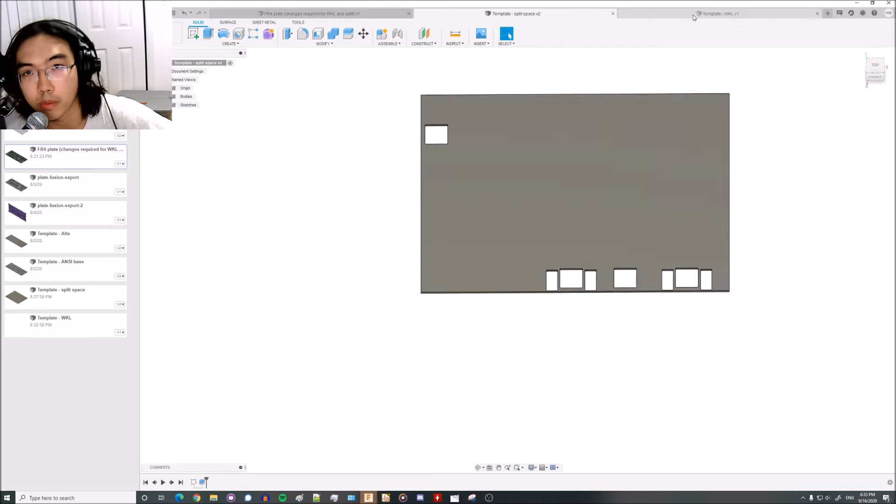I'm just gonna wait for some more people to show up on the stream before starting. In the meanwhile, I'm doing some plate work on Boston. I'm adding split space and winkeyless to the plate. So I'm gonna be doing that for a couple minutes until some more people show up, and then I'll get started designing Gondo's PCB.

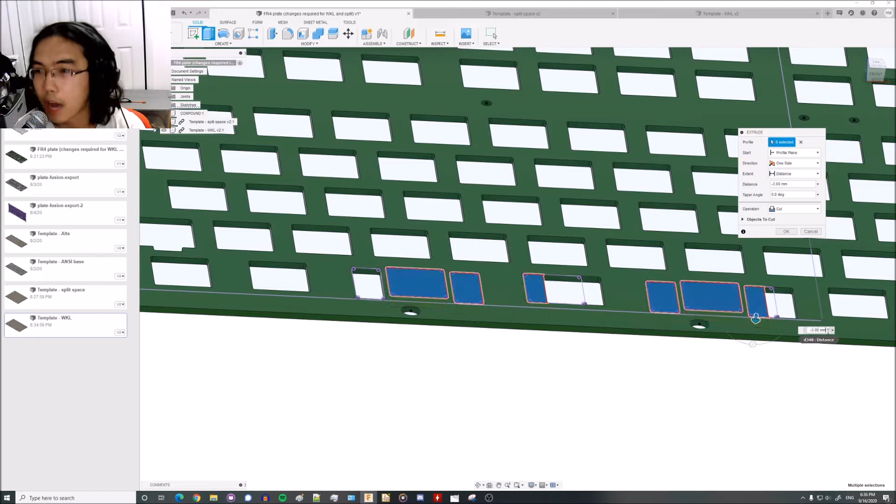So I'm actually gonna do it partially. I might just straight edit the KiCad plate file. So this is an FR4 plate, so I actually have a KiCad file for this too, in addition to the Fusion file. I could make a new KiCad file for this new plate, but I'm gonna see if I can just edit the original KiCad file, and that might save me a bit of work. Because all these holes and stuff, you have to basically place in KiCad new. So...

It's negative 0.5. Wonder if I can see who's watching. Okay, let's do winkeyless. So I'm gonna do the same thing. I'm gonna join this plate to here.

It's backwards, I'm gonna flip it. That looks right. Okay, and then I'm gonna do the same thing. So make a sketch on the original plate.

And if people have questions on what I'm doing right now, feel free to ask in chat. It's gonna project, should give me all the outlines for these cutouts, and then I'm gonna hide that and use a sketch to do a bunch of extrudes.

Oh, that's okay, that's a stab for the 7U. This, and I think that's it. Oh, it's just wait, oh these are for the 1.5U. This really fucks up the plate, doesn't it?

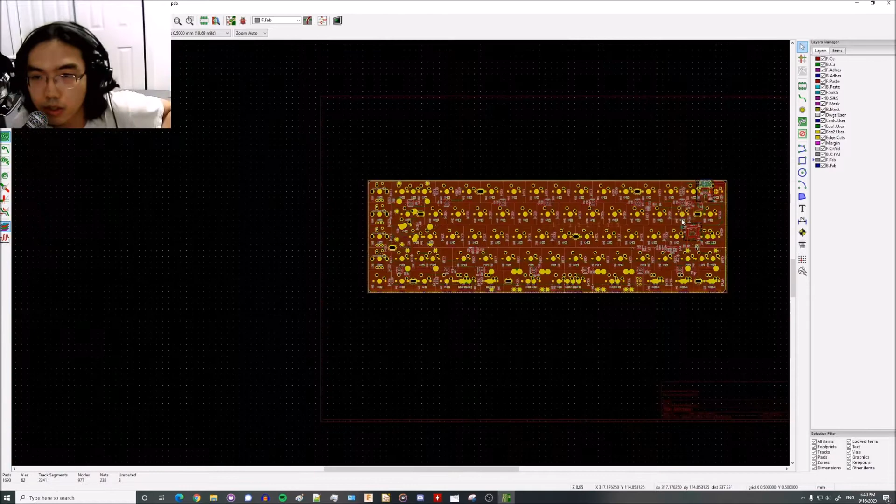So this is Gondo's PCB in KiCad. Let's export a step of this. We're gonna go to File, Export Step. Actually, let's go to 3D Viewer first and see if all the components I need are there, because a lot of times the USB port isn't there. Let's see.

Okay, 3D Viewer, yeah, it's missing the USB port. Let's see if I can add that back in. Otherwise, I can just pull the step file off the library and then add it in Fusion.

So you go to the component, this is the USB-C port. Right-click Properties. Update footprint, open footprint editor. There's usually a properties section. There should be somewhere where it sets the 3D file. Oh, 3D settings, okay, that is right. Step file.

So let's just export it and then I'll add the USB port separately, because it has these two mounting holes and that's a really easy joint in Fusion. Export step, let's pick a directory, export. I think I might have exported this already in the past, but let's do it that way.

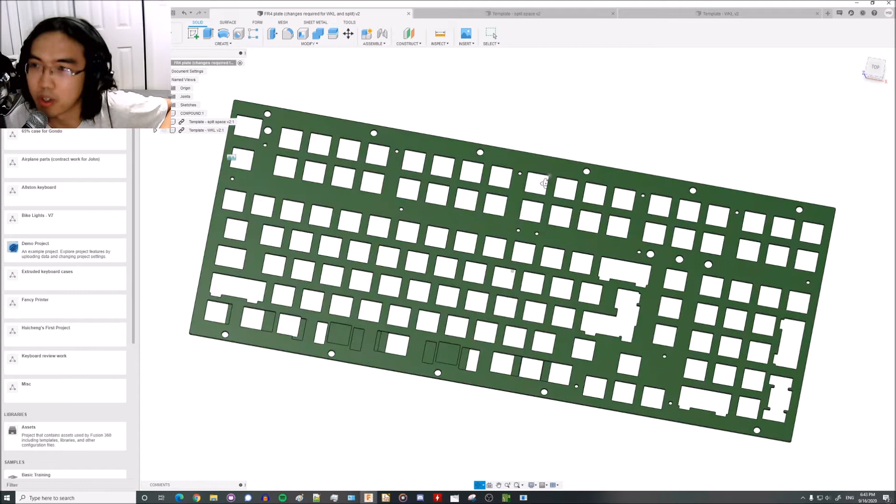Yeah, I guess I'll probably take a look at FreeCAD. I'm really used to SolidWorks, which is like $4,000, and that's what I generally have used during the day job as an engineer. I would really like to have that, but that's $4,000 and kind of hard to justify. Fusion does most of what I need to do. Yeah, I'll go check out FreeCAD at some point. I've paid for Fusion for another 6 days, and then maybe after that I'll check out FreeCAD.

Okay, let's close this because I'm not working on these anymore. So let's start a new project. This is Anticheww case.

All right, so let's upload the steps.

Yes, I have SolidWorks too. They did a free license last year. Oh, there's a free way to get SolidWorks? I would like to know that, because I've only had SolidWorks access when I worked at a place that used it, and it would be great.

Okay, so where did I export that step? Should be an Anticheww step.

So the first thing we're gonna do is add the USB port because that's missing. Let's also upload the USB port - that should be in the Acheron library. So GitHub, Acheron library, 3D models. Let's do the USB Type C 31M12. That should be the USB port.

Cool. Wait for that, and then once we get the PCB set up, I'll describe what I want to do for a case. So let's open the PCB. Let me rename this to the Anticheww PCB. Okay, so here's the PCB.

So I'm going to do it similar to the Boston cases I have now. Where's my bus? Oh, here it is. So this is my Boston prototype - I'm going to do a case probably similar to this. So the thing with Boston, I designed this to be made on a 3-axis CNC. So if you look at the side, it doesn't really have an angle. I'm not sure if I can show that well. Okay, there we go - yeah, sorry, this is a terrible camera.

So most keyboards look like - I don't know, let's pull up an example. Let's pick any keyboard, let's say Austin. So these have an angle on the side. There's no good side profiles - maybe this one. Let's see if there's a side view. Maybe not, okay let's just go to - I know, what's a random 65%. Okay, Aurora input series - this is kind of a bad example.

We can kind of see, so you have this typing angle here, and then you have where it meets the table, and usually this is like, I don't know, 6 or 7 degrees. So a lot of cases have those two as one piece. The issue with that is it's really hard to make on a typical CNC. A typical CNC only has 3 axes, so it can go in X, Y, and Z. If you want to make this angle, it gets a lot harder - you have to have special fixturing so it can hold the case at an angle when it mills it.

If you have a 5-axis CNC, you can do it pretty easily. If you have a 3-axis, you need to make special fixturing. 5-axis CNCs aren't really accessible to a lot of people, so you'd definitely have to send it out to a machine shop. Whereas with a 3-axis, there's a chance your local makerspace has one. So I'm going to design this to be easily made on a 3-axis.

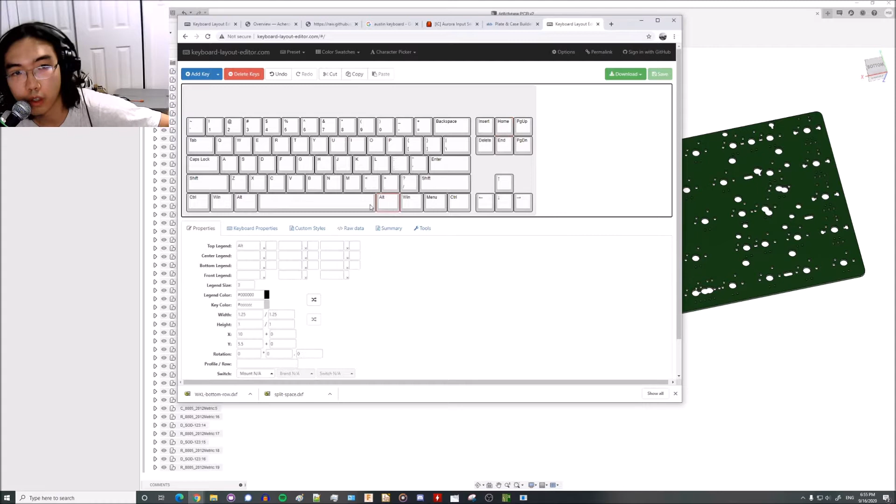First, we're going to delete the F row because 65s don't have that, and delete the numpad. Then these keys get moved. So this is the layout we want to do. Let me rearrange these windows - let's put this one on the left and this one on the right. So these are smaller. Anticheww supports a lot of layouts, but for now let's just do the basic 65%.

So this bottom row right here - there's no right side Windows key, and then these all become 1U. So 1, 1, and 1. This gets moved over, and then there's a 1.75U right shift, so this becomes 1.75. Let's move the arrow keys over.

And then have page up, page down, home, end. These actually aren't that important which keys end up where, as long as their unit size is the same, so as long as all the 1U's end up in the right place. This doesn't really matter, but let's just do it anyways. Okay, that looks like a 65% to me.

And then we'll add ISO and all the bottom row options real soon. If you go to raw data here, it'll give you all this raw data - this is what the plate generator takes in. So I'm going to copy paste that into here. I want MX stab type. I mean, no one's really going to use Costar probably, so I'm probably just going to do cherry only.

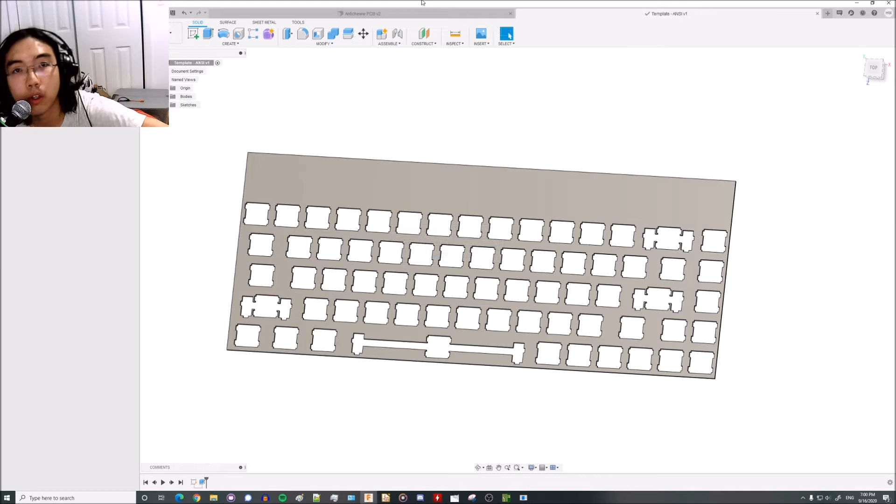Okay, Anticheww PCB - okay, so let's start the actual case design. We're going to make a new design, let's save it as Anticheww, aluminum case - also this is going to be top mount. I haven't really done gasket mount or other styles before, so top mount's pretty straightforward. So let's just do a top mount case. Let's insert the PCB - Anticheww, let's insert the PCB into the design.

You save it into plate files. Yeah, I generally organize my Fusion folders, they're usually extremely messy, but I usually have folders for plates and PCBs. Actually, the PCB I sometimes don't put in a folder, but that's just how I like to organize things.

So we have the PCB. Let's figure out how big we want to make things, and decide if I want to start with the plate or with the top half, the top part of the case. Let's see. Well, let's start with the top half.

So we're gonna make a new component. Let's call it the case top. Case top.

So the thing here, I really don't want to reference any of the geometry off this PCB, because Gondo is gonna make some updates to it, and when the PCB changes I'll have to update it and that'll break every single reference, and then I have to go back and fix all of those, and it gets really messy. But let's see if I can do it without referencing it. Actually, we'll probably have to reference off the PCB, at least for now.

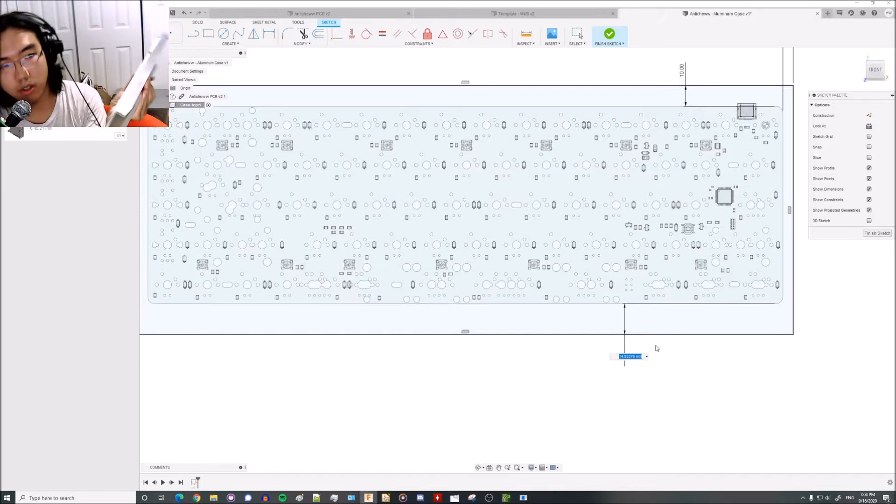Okay, well I can eyeball this. So this distance — the PCB is roughly at the edge of the keycaps, so it looks about, say, 9 or 10 millimeters on top and bottom. So let's use those. Let's say 9 millimeters, and we can make it smaller later if it turns out we can.

So let's do 9 millimeters. What I'm gonna do — I don't want to reference the PCB itself because I'll have to replace that later when Gondo updates the PCB. As far as I know, he's adding a JST header and might add a center USB port.

But for now, let's — so I'm gonna delete all these dimensions, and Fusion's gonna leave things the same size when I delete them. Then I'm gonna dimension it in a way that does not reference the PCB. So it's 313 by 112.

Okay, as long as things don't move, this should be okay. Well, things are gonna move. How do I want to do this? I could just do that off one side here. So I'm gonna have to update these when I update the PCB, whenever Gondo makes those fixes or changes.

Okay, so come to think of it, I should have done this on an offset plane. Fuck, because when I do this extrude, all these features are gonna get in the way. Okay, let me just redo this. I'm gonna delete that sketch, and then I'm just gonna make an offset plane. It makes life a lot easier.

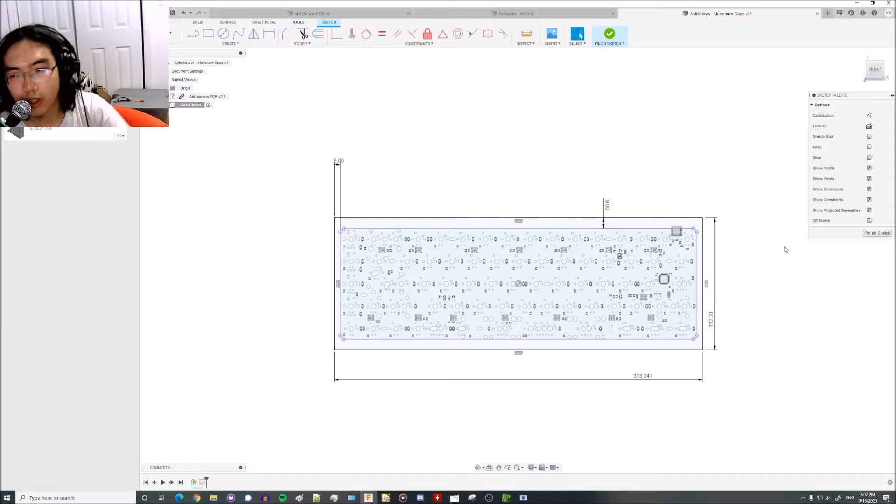Let's delete these, and then actually I want to keep that. Let's keep those two, and then define this by the size. That way, when the PCB changes later, we only have to update these two dimensions and not all of these other ones.

And then let's pick up the distance from the plate to the top. How do I explain this? Let me make the camera bigger. Sorry, where's OBS? This is OBS. Okay, let's make the camera bigger.

I don't really have any good examples here, but maybe I should just do it in Paint. Let's fire up MS Paint. Okay, let's move this so it's visible.

Okay, so you have your plate. So let's say this is your plate. So I'm gonna pick a... this is a top case usually, and it looks kind of like this or something. So the important distance, one of the important distances you want to pick, it's mostly a visual thing. Let's do a different color.

Is this distance from the top of the case to the plate? Actually, let's zoom out. So on most keyboards, this is around 7 to 8mm. This basically determines how much of the keycaps you hide. So you have your switch here, and then you have your keycap, right?

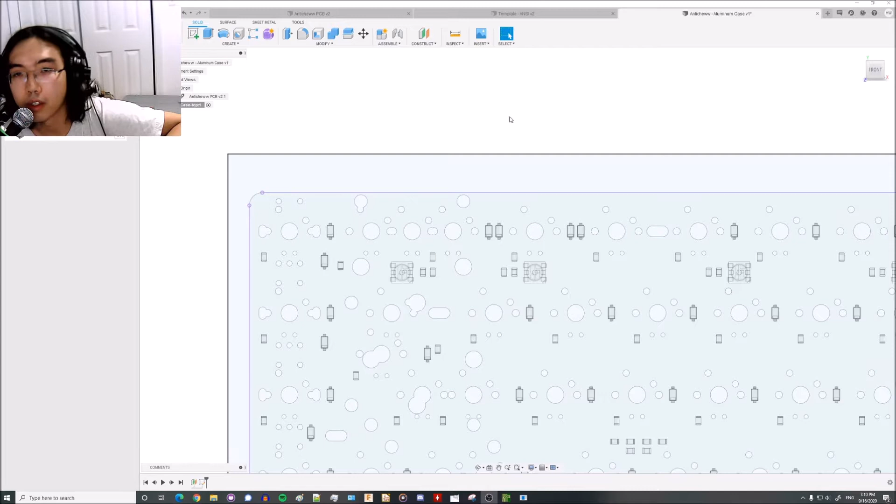So where is it? Okay, there's a couple important keys here. I'm pretty sure this is escape and tilde. Shoot, it's not letting me project. Oh shoot, what the heck is going on? Should be in design.

What? Okay, let's have this sketch here. So let's define the insides of the case, or sorry, the inside edges. Let's project a couple of these. On 65% it's a lot easier because there's no key separation, so we're just gonna do these 4 switches on the corners.

Yeah, so escape, control — actually control's not a great one to do, but it is what's there — and then I think this is right arrow. So let's project off those so we can get the centers off them. All right, so that's next. Let's make the inside edges of the case. Whoops.

It's not where we want it. Let's just arbitrarily place it here.

For this distance, I usually use 10 millimeters from the center of the switch to the edge of the inside of the case.

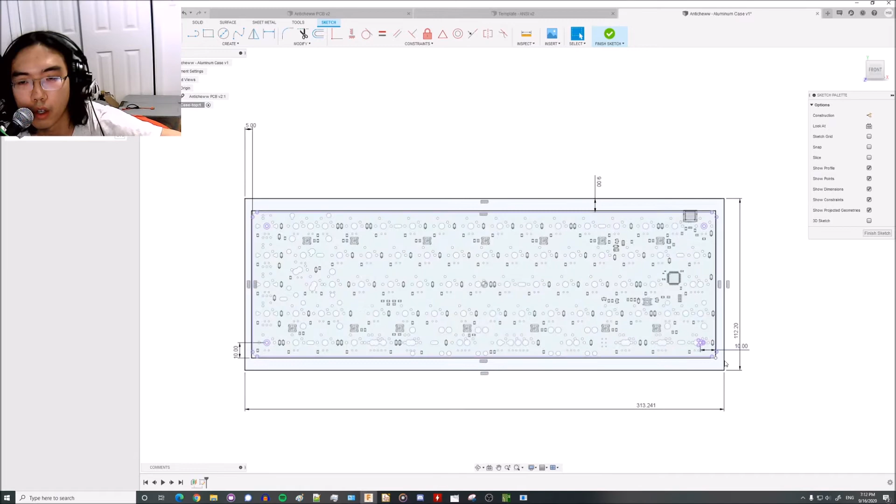Since we're going to update the PCB file later, I want to minimize the number of references to the PCB itself, so I'm still going to redefine these as the dimensions of the length and width of the insides. Okay, so now that's done.

So let's do an extrude. E for extrude. We're going to do 7 millimeters. Okay, that looks pretty good to me.

And then that's the top half of the top of the case. Let's figure out where you want the split between the top and the middle to meet. It kind of varies from design to design, but let's do it past the bottom of the PCB.

So for a second extrude, we need a second sketch. Let's do the bottom half of the top of the case — confusing terminology, but this is also where we set the dimensions of the plate. Let me figure out how I want to do this.

So it's going to be top mount. Let's use M3 screws for the mounting screws — it's a generally pretty safe screw size to use. With M2 and M2.5, especially on an aluminum case, you risk those threads stripping out easily. I personally tend to stick to M3 and above.

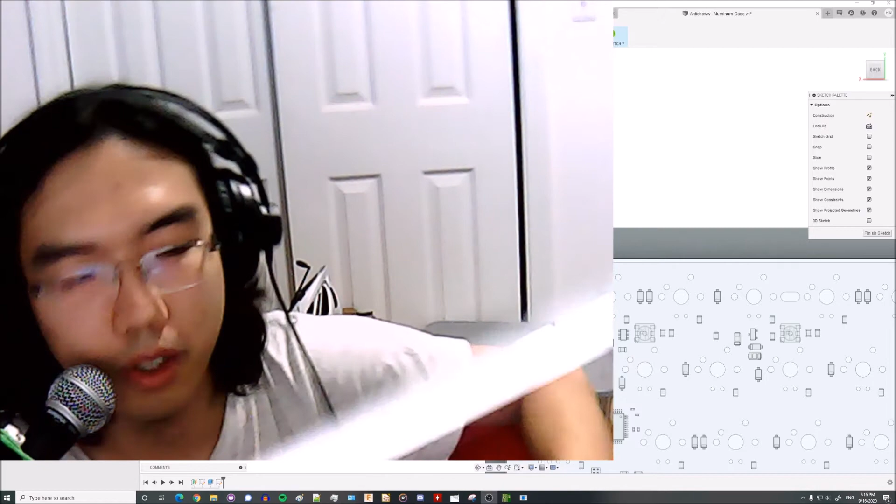So this is a disassembled Boston. This was actually the first prototype. I took it apart because I had to steal the switches from these to build another prototype — I'm kind of short on switches right now and wanted to build the latest prototype. So I took this one apart. This is the top case.

You can kind of see — how do I show this well on the stream? Yeah, this is... actually, maybe let me just pull up the CAD files. That's going to be easier than using this shitty camera.

So, where did I keep my Boston files? It's in keyboard. Okay, so this is Boston, or the aluminum version of Boston as I have it right now.

So the top case, let's isolate it. I kind of did it this way — where's the plate? Here's the plate. Wait, that's not visible. Okay, here's the plate.

So on top mount, you have the plate, and then you have this protrusion off the side with a hole in it — that's where the plate mounts. And it mounts to the top side of the case, hence top mount.

So I have these little dimples here, kind of like circular cutouts in the case for the screws to go. And then I have this for attaching the bottom. But let's add those features.

So on this sketch, we're going to define where these circles are, and also I have these opposing circles — that's where the middle of the case mounts. Let's do visible edges. So that's where the case screws that mount the middle of the case to the top of the case go. So let's do something similar.

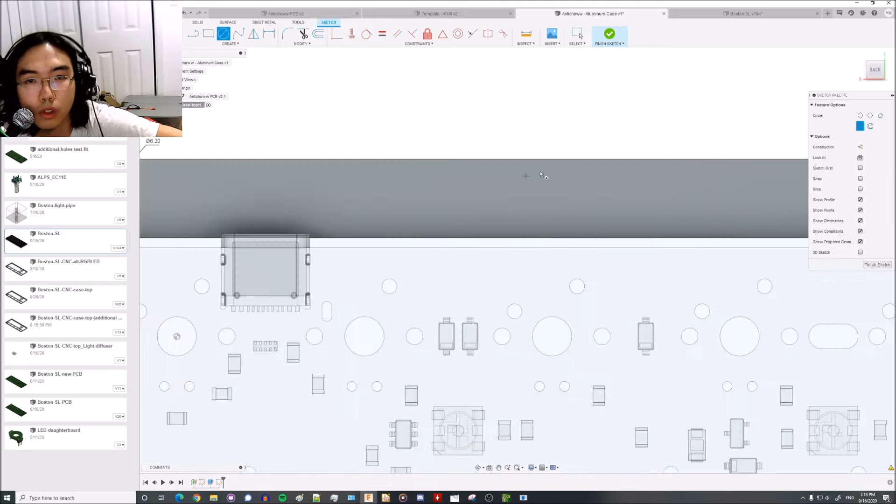Okay, so this corner we probably want to use for the case, and then let's do 3 on 3. Let's do 3 screws on top and 3 screws on bottom. Maybe 2, I mean.

So this is the USB port there. That's not good, makes things a little trickier. Oh, that's really recessed, okay.

Another consideration is this USB port and where I want to put it. Let me think. Okay, so let's have these corners, so we'll have screws that mount the bottom or the middle of the case to the top, going through these holes. So let's do like 4 by 4.

Where's some logical places to put mounting holes for the plate? So we have the middle, I guess. Let's make a construction line here.

Let's make this circle coincident. And then let's do another circle in the middle, so wherever the midpoint right here is. And do one opposite at 2. Is that a construction line?

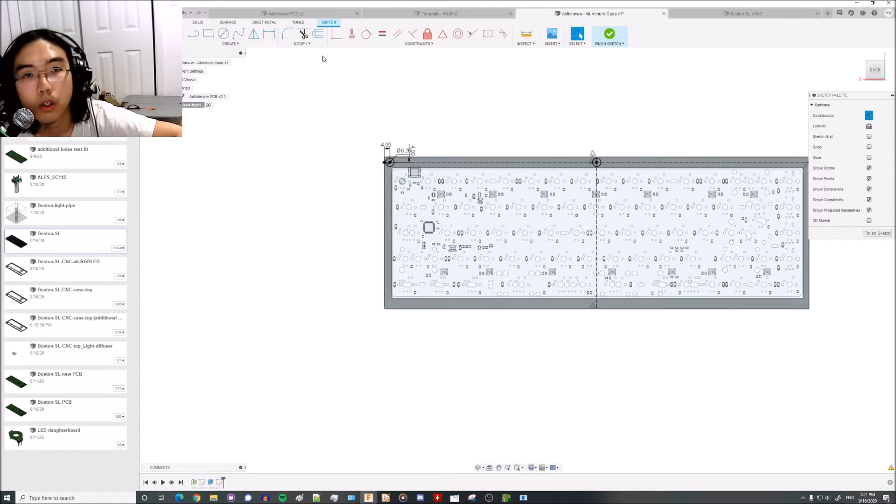Oops, let's do this. So let's add more holes to the bottom. Create mirror. This circle and this circle to the bottom. Then we're going to mirror these 2 circles across this middle line here.

Okay, so let's use these for mounting the case, and then we need to pick separate locations for the plate. This USB port location is unfortunately kind of annoying. I'm pretty sure Anticheww was designed for... was it not gasket mount, or for tray mount, so it doesn't really have to worry about this.

But since I'm doing a top mount case for this PCB, I'm going to have to deal with it. This USB port is unfortunately placed. Let's see, could just do like here.

Like let's do... actually, for the tops, let's do for the screws that mount the top of the case to the middle or the bottom. Let's do 4 of them, and we're just gonna divide this length into quarters. So this is what...

Oops, sorry. So this circle and this circle are 305.241. So let's fire up the calculator. Let's divide that into 4 of them, then we need 5 gaps. So just call it 61. Okay.

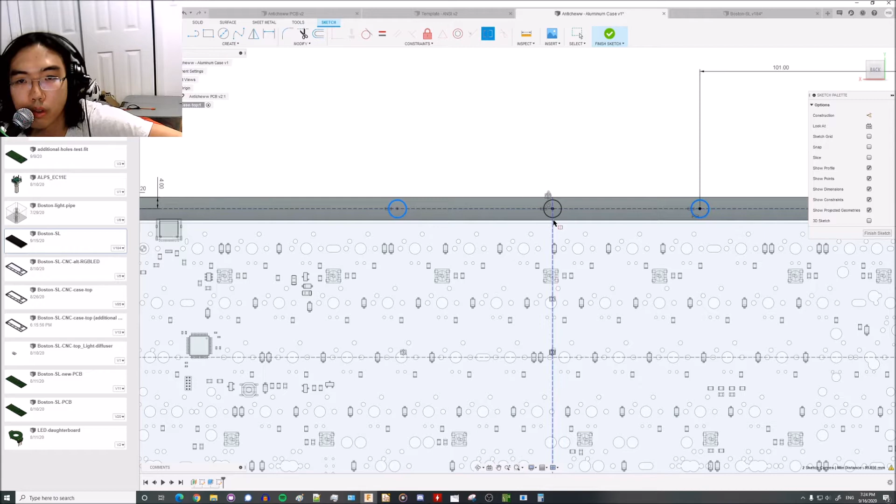So do the same thing here. Equals, and then symmetric, 1, 2, and 3. So we'll use these 4 for mounting the top to the bottom, and then for mounting the plate itself, we'll use this middle one, and then let's add one to each end.

So I'm gonna be avoiding this USB port. Actually, I could make this asymmetrical, so this is home row, so you're mostly gonna be typing here. So you kind of want to feel balanced on the alpha keys, and then these are just like nav keys, and if it feels a little more inconsistent there, I don't think that's much of an issue.

So let's do what, like 15. Let's do like 10. Let's do like 10, okay. Now let's mirror that.

We don't need... actually, we don't want to mirror that because of the USB port. That still might end up feeling inconsistent, because I really want to put the mounting point for the plate like right above this key here, but that's gonna get in the way... that might not get in the way of the USB port.

Let's do like here, whatever this is, let's do like 8. And then I don't think that's gonna interfere with the USB, because I mean, you have the USB cable coming in, and that's kind of wider than the port. Actually, let's do some measurements here. Where are my calipers?

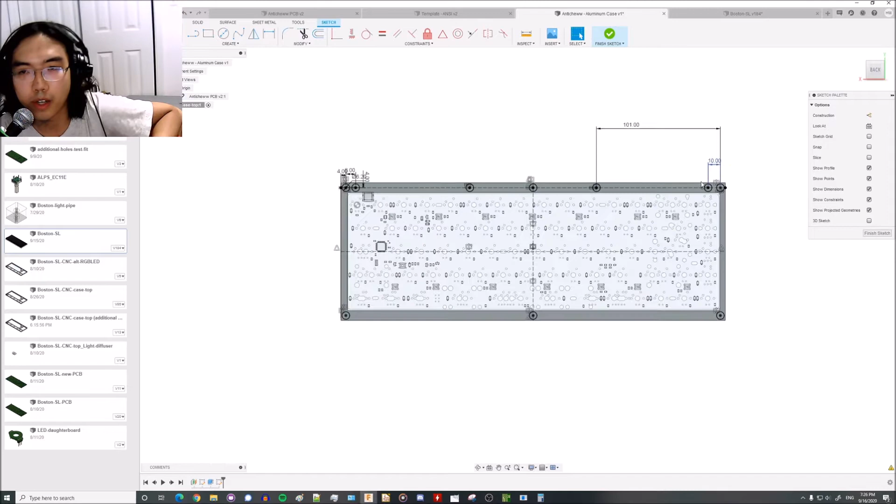Hi everyone, I'm designing a case for Gondo's PCB. I'm in the middle here, so I'm designing the top half of the case right now, choosing the mounting points for the plate. This is going to be a top mount case, so I need to choose these wisely. I'm trying to choose this hole so it doesn't interfere with the USB port.

But to do that, I need to know how wide a USB connector is. To do that, I need to measure a USB connector. To do that, I need to find my ruler or calipers.

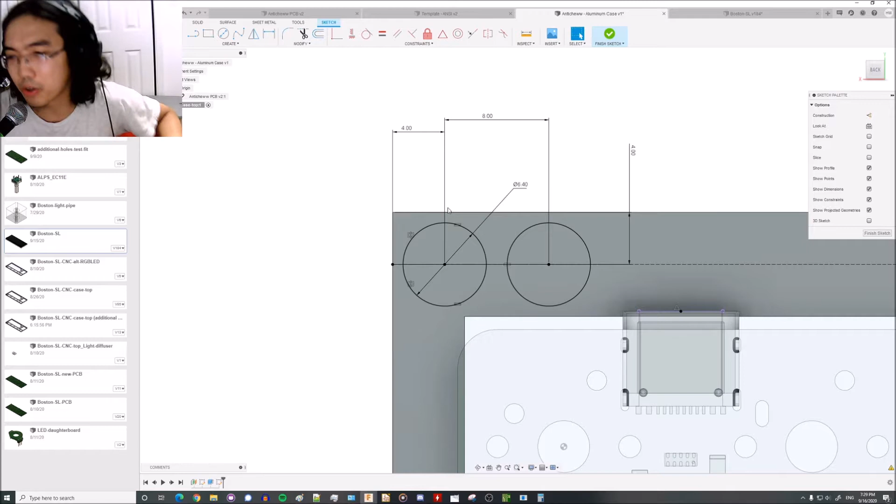Personally, that's like the smallest end mill that I'm not really afraid of breaking. Once you go smaller than maybe 4mm, your end mills start getting really fragile and start snapping really easily. I don't enjoy machining with small end mills because you have to be real gentle with them or they start breaking.

So where do I want to put this hole? We could just do it right over, where's it? Backspace, I think, this is probably backspace. Sorry, let's pull out the layout. Okay, so this is page up, and this is split backspace.

Yeah, so most people use M2. Foggy really hates M2. I personally don't like it either, I've mostly used M3 these days for all sorts of things in my engineering work, pretty much everywhere. I've never really gone smaller than M3. I think I've done a thing or two with M2, but M3 is a lot stronger than M2, and a lot more resistant to stripping.

Also, the larger your screw, the larger the head of the screw is, and the hex they use for the Allen key is larger, and the larger your hex head is, the harder it is to strip. M2s use really small Allen keys, and it's really easy to strip the screws, both the threads and the head. So yeah, I would like to stick to M3 on this design.

So let's try to put this over here. Wait, so wait, this is backwards. Is this caps lock? No, it says right side USB, right? Wait. Shit, this might be... okay.

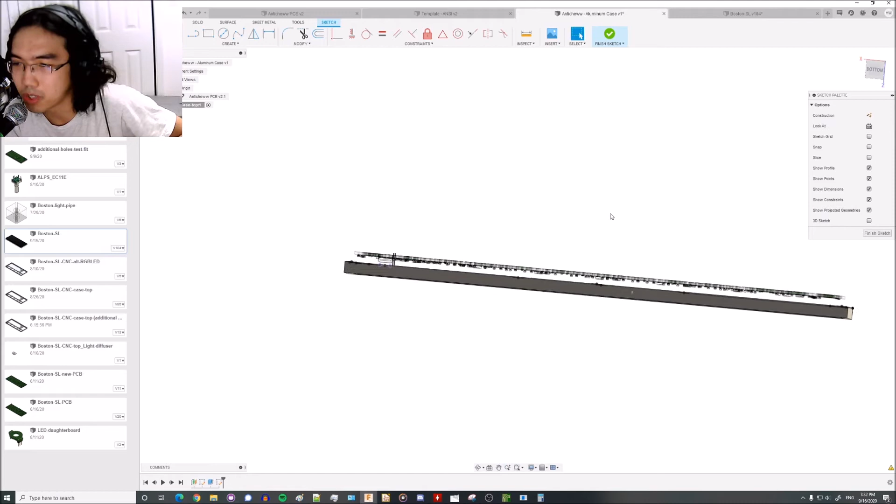Oh, radius. Okay, I thought these were diameters. It is kind of more fragile, mostly due to the keyboard case. Yeah, that makes sense. So you're using an 8mm diameter and then a 4mm.

Okay, so this case is actually upside down, which is unfortunate. Let's just go back and edit these features. You can use a 6mm hole fine, save you some wall thickness. If someone wants to get it made in the US, I should probably do like 6.4 instead, because US machine shops generally use imperial tooling.

So instead of 6mm, it would be a quarter inch, so that they can use their larger end mills. Metro Gang says rotate it 180 around the center axis of the PCB.

Yeah, but it's more proper if I go back and edit the features. I'm a huge proponent of parametric modeling in general, where you do everything as features, and if you want to fix something, you go to the earlier feature and fix the thing.

So this top half, yeah, this is upside down. So this plane is off the wrong side. We're gonna redefine this plane to the top side of the PCB, and then 5mm off that. So we're gonna redefine the sketch plane.

So the thing when you go back and edit features, it breaks later features, so you had to go back and fix everything. We just edited this plane, then we had to edit the sketch. So this is a hot mess. But we're gonna fix this.

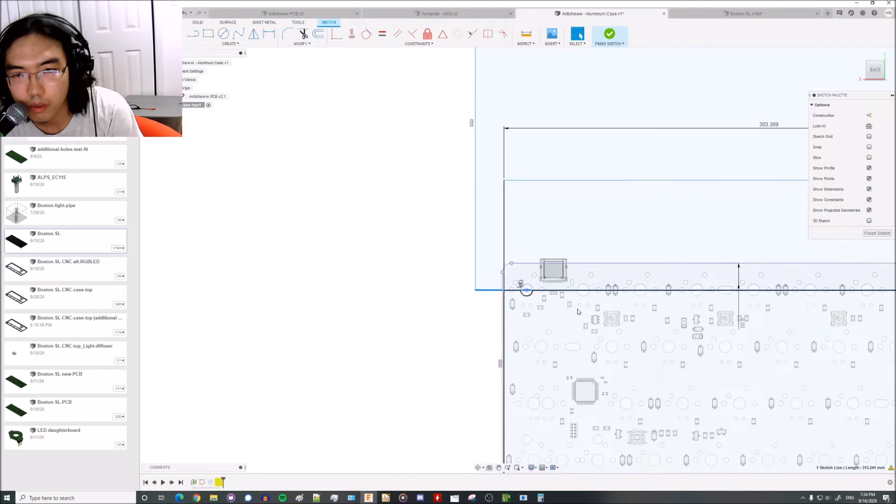This shouldn't be on this, but I can't find the relation that's causing it to do that. Yeah, I'll just delete it and remake it. This is the inside, this is the outside.

It's 10mm. Then we need to delete this here, delete that one so it doesn't reference the PCB. And this sketch here, this is a hot mess. But it's going to be fixable.

This is gonna break. Oh, okay. Oh, the extrude fixed itself. Okay, so I think we're on the right side now.

So I'm pretty sure this is caps lock. This is centered, stepped. This is control. This appears to be a shift key based off the steps. This appears to be arrows. Okay, so I think we're oriented right now.

So now we're gonna fix this sketch. I'm just gonna start the sketch over again. So we're gonna look at the bottom side of the top, and we're gonna choose mounting holes for the plate because this is a top mount case.

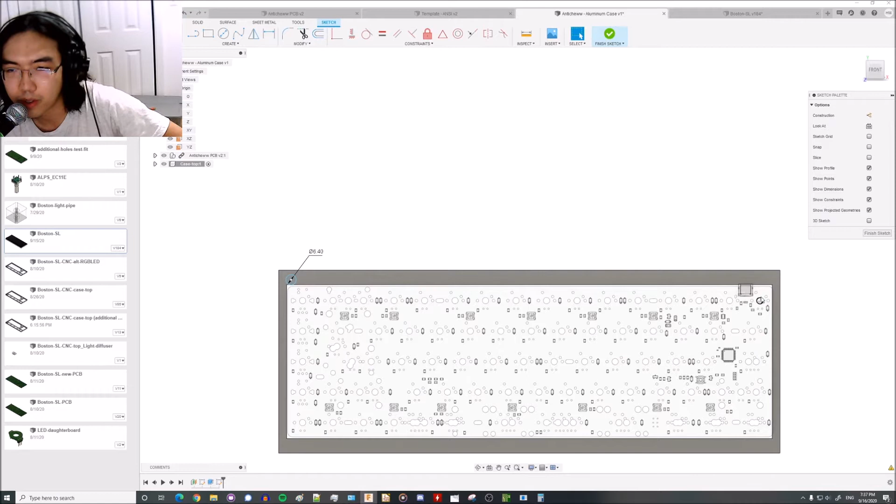It's gonna be a huge pain to move it right now, so I'll just leave it. Normally you should locate your planes and your origin in the center of the part for parametric modeling - it makes a lot of things easier, like if you need to mirror parts or join things. But that's not the case here, and we're just gonna live with that because I really don't want to move this to whatever - there's gonna be a million decimal points, and it's just gonna be a huge pain.

That might save me some trouble later. But if I just want planes, I can always just add additional planes to the center of this part. So it's not a ton of extra work if I don't locate the origin optimally.

Okay, so let's do 6.4. I should actually make the top and the bottom taller, because this is going to leave you with a very small wall thickness - 0.8, yeah, that's a really thin wall. Let's make the top and bottom a little... actually, I could just make these not 4, I can make them 5. Yeah, I think that should work.

Okay, so what are we doing? So we're going to make a bunch more of these circles that will define where the holes for the plate will be.

Actually, let's just do a bunch of mirrors. So we're gonna make some sketch lines to mirror things. Why is it not picking up on this? Okay, center, midpoint to midpoint. Let's make another one across the other axes - middle to middle, make that construction.

Just seeing who's viewing the chat. Okay.

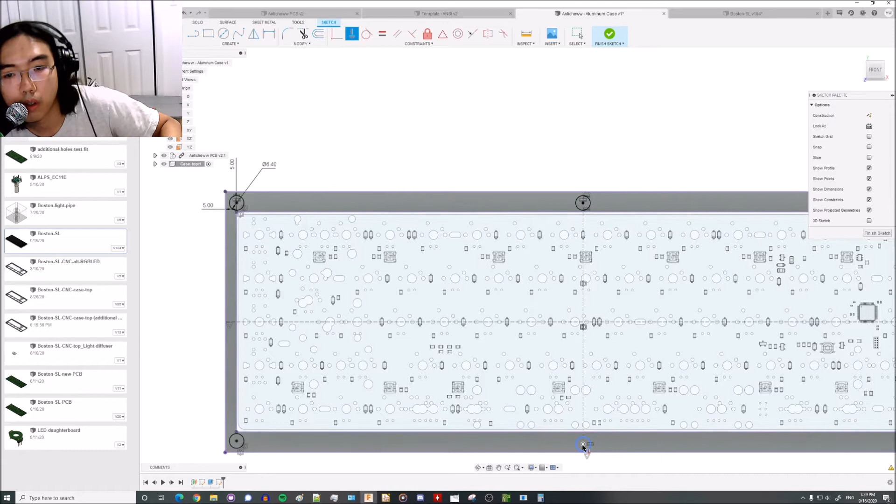Then let's make 2 more in the middle. Make them equal to 6.4, and then we'll make them horizontal. Okay, so have those, and then we'll use this - we're adding more holes for the case.

Actually, let's do - so what's this distance? So if we want 4 holes across the top, there's 3 distances between the holes. So I'm gonna measure this total distance from these - that's 303.4 divided by 3, so 101. Okay, so maybe 101 apart.

Make it equal and horizontal to this one. Okay, and then I'm gonna mirror that a couple times - same thing. Actually, let's save the mirror for a little later. Actually, no, let's just mirror now. Mirror this. Mirror those two. Then we'll use these 4 for the case, for attaching the top side of the case to the bottom.

And then we need to choose another 4 holes for attaching the top mount plate. So this one, let's do here, then horizontal, just like located right above the escape key.

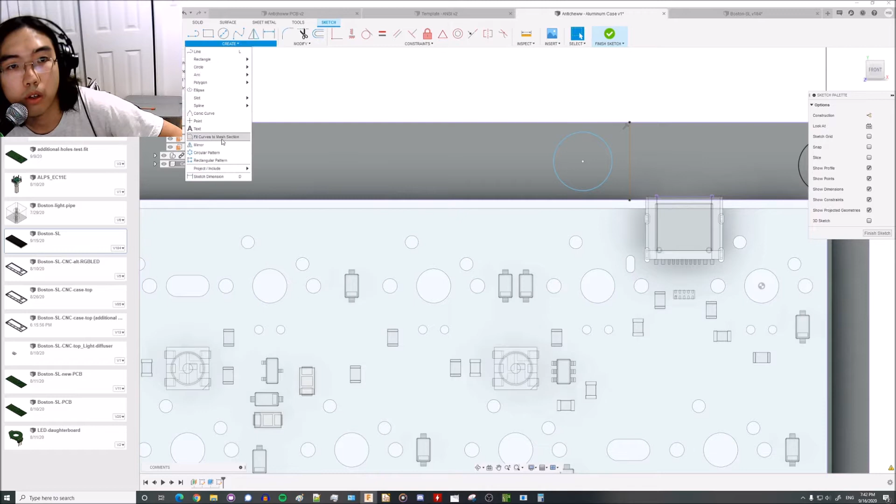So we're gonna do 14 millimeters wide for the opening for the USB port. So 14 divided by 2 is 7.

Then we want to make sure there's enough, like thick enough wall between - so there's gonna be an opening for the USB port here, and then there's gonna be this mounting hole for the plate. Just like 5. So this is kind of not ideal because I really want this like here, so the corner is supported rather than kind of offset a bit, but it might be okay. I can't really put a hole here because that interferes with - I really want the mounting hole screws that attach top to the bottom beyond the corners, like both for aesthetics and all sorts of other reasons.

So I can't really mount the plate here. I can't really do it here because that'll interfere with the USB. So we'll just do it here. Okay, let's make this equal, then horizontal. Okay, what else do we have?

Okay, so I need to mirror that. Actually, to make things consistent, we'll just mirror this one across to the other side. So we'll mirror this hole to the other side, and then we'll mirror both of these to the bottom of the case.

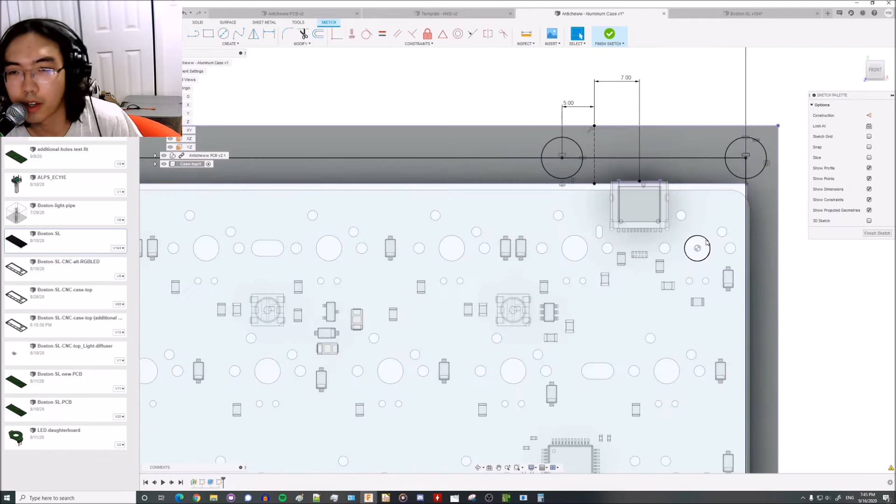That's correct. Okay, so the dimensions in this earlier sketch are not correct. This one should be past here. So let's change that. What's defining it? Oh, okay. Cool, that looks correct, that looks correct.

The PCB still appears to be asymmetrical relative to where the keys are, because you notice this gap is larger than this gap. But it is correct off of where the centers of the switches are, so we'll just keep that as is. And then, since I'm trying to minimize references to the PCB, I'm gonna redefine these.

Cool, all right, so then how did that affect the sketch? Oh, it actually bought me more room here. That might let me move this hole from this side to here. Let's see if I have space for that.

This is the edge of the USB cutout. Okay, yeah, I think I actually have room to do this. Okay, cool, that's a lot better. So this looks like a reasonable wall thickness.

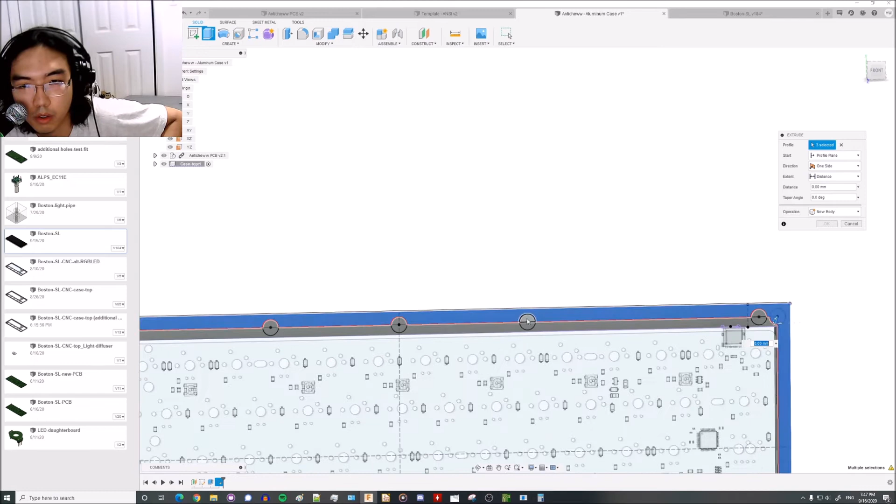Okay, so we're done with that sketch. Now we're gonna do an extrude to make the walls on the sides. So we want this corner, we don't want this, we want this, we don't want that. The ones where I'm choosing the additional extrude stuff — that's gonna be where the screws that mount the bottom of the case to the top are gonna be. So we want that, and we want these, these, we want these, these, and we want these.

So how tall do we want to make them? Let's just do 10 for now, and then we might want to go back to this. Okay, so how thick is the case right now? You also want to — I'll just fill out those later. You want to choose the thicknesses of parts based on available material stock.

So this is 17 millimeters, so let's bring this down to 15 because that's a really common material size. You want to choose thicknesses based off of how thick the sheets are that you can get material in. I'm not familiar with the metric ones, but in the US you can get like a quarter inch, the next size up is like 5/16, next size up is like 3/8 or whatever. You want to choose a common size and make that fairly close to the thickness you need.

But not exactly, because you want a little bit of room to remove material. If you make the thickness relatively close to the stock size, that minimizes the amount of material the machinist has to remove when making the case. What you really want to avoid is, say material comes in 20 millimeter thick and 25 millimeter thick with nothing in between — if you make a 20.5 millimeter thick case, the machinist has to buy 25 millimeter stock and shave off 4.5 millimeters. Whereas if you made the case 19.5 millimeters thick, they can buy 20 millimeter stock and only shave off 0.5 millimeter off one side. So it reduces the amount of material that has to be removed, which makes everything a lot cheaper — thinner stock is cheaper. So you want to choose your thicknesses carefully.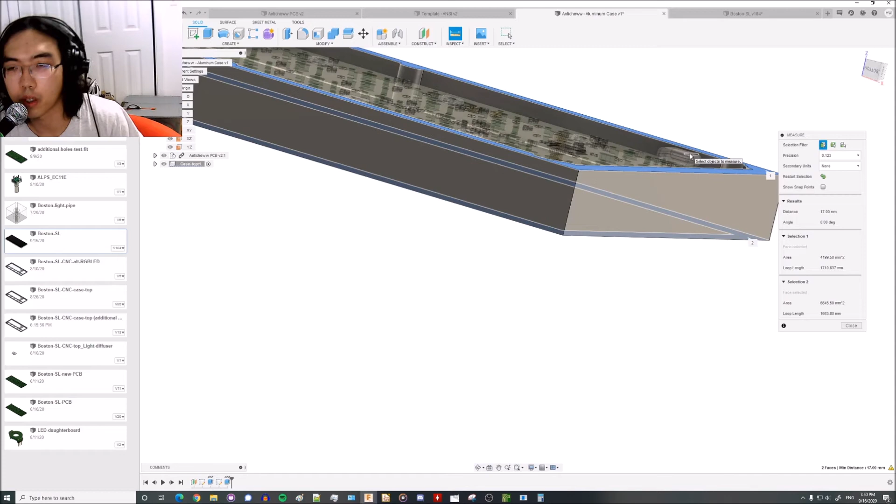So we want to cut this extrude, since this is 17 right now, and just want to reduce it by 2.5. So 10 minus 2.5 is 7.5. This should be 14 and a half now.

Cool. Though we also want to be careful where the USB port is, or how thick this is for the USB port. I'm also going to have to model the cutout for this later. Let's make this a little... I kind of want the seam to be in the middle of the USB port, so you can make the USB port without having to do a dedicated hole in the side, which adds a machining setup. I can explain that better once I actually model it.

Okay, so we have this distance shown. Sorry, I was going to check something. So let's do a section analysis, kind of a cutaway view. Where is this seam relative to the USB port? It's pretty close to them. I could make it a little taller. We really want to be about here. It's got like a millimeter, but that gets close to the 15 millimeter stock size. This is probably fine. Okay, let's turn off the section view.

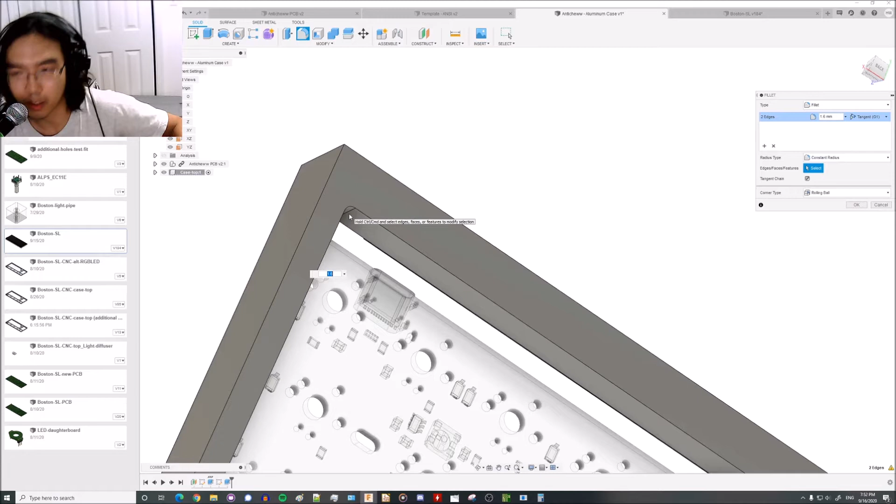1.6 is about the largest you can go without really... you can probably go a little larger, but the larger you make this fillet, you can use a larger end mill to mill it, which is nice for the machinist and makes things a little cheaper. But sooner or later, this fillet is going to start interfering with the corner of your keycap, so I think 1.6 is generally a good size. You can go smaller, but it'll cost you more because the machinist has to use a smaller end mill, and small end mills break more, don't cut as fast, and have a maximum depth they can go. Generally, larger end mills are better, up to about 3 millimeter radius, maybe 4 millimeter. Past that, you don't really get as much out of it.

So we're going to add those inside fillets, and then for the outside, this is really just an aesthetic choice. Outside corners don't even need a fillet, but you don't really want the sharp corner because this is going to be a really sharp corner if you machine it this way, and then you're just going to hit your palm against it and draw a lot of blood. So we're going to round these just to prevent the user from getting cut.

Just do 5, let's see how it looks. It's kind of squared off as far as cases go. How does this look aesthetically? Part of me wants to make the walls thinner.

Oh, hey Gondo. Okay, PCB, let's see, PCB check. Plate check, components check, case check, Fusion. Yes, I am in Fusion.

There was news earlier today that Fusion's making their free version a lot worse. They have a free version for personal use, and it used to be the exact same features as the paid version, but it's a lot worse now, or they're going to make it a lot worse starting in October. So there's a lot of talk about people moving off Fusion. Gondo also prophesied that Autodesk was going to make Fusion a lot worse for free users in the future, and he was correct.

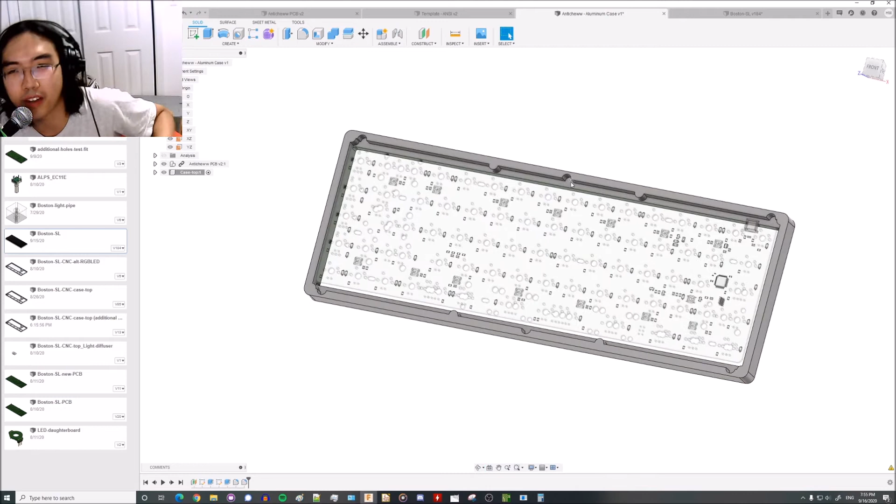We're using Fusion because I think most people still use Fusion. I'm gonna try out FreeCAD at some point, but I actually have paid Fusion for another 6 days, I think it expires the 22nd. So I'm gonna use Fusion till then, and then think about switching to FreeCAD, OpenSCAD, or another CAD software, or I might just pay for Fusion because cynically, they have a 40% off sale. Same as when they announced they're making the free version a lot worse, they also announced a 40% off sale, and that's real tempting.

FreeCAD definitely has a learning curve. Yeah, I've heard not great things about it, friends who tried it said the UI is terrible, but I guess it's not pretty, that's for sure. It will only get worse. It's like when you want to jump off the Fusion train, the sooner I switch to FreeCAD, the less it will hurt later. But I'm still really used to Fusion. Evil says the newer FreeCAD has an extension called Modern UI which makes it a bit better. Okay, I'll check that out. But yeah, we're using Fusion.

So kind of getting back to the design here. Aesthetically, I kind of want to make the thickness of this wall match this wall, but it's not necessary. It makes your keyboard a little wider, which some people don't like because they want their mouse space, so I can always change that later. Let's just proceed with this. So I have a rough top case.

So I was adding fillets, I made these 1.6. Sorry, the chat scrolled.

Gondo says what happens always is the companies make their products free to make people used to it, and they use the feedback to improve it, and when it's decent they lock it down. Yeah, this was really predictable with Fusion.

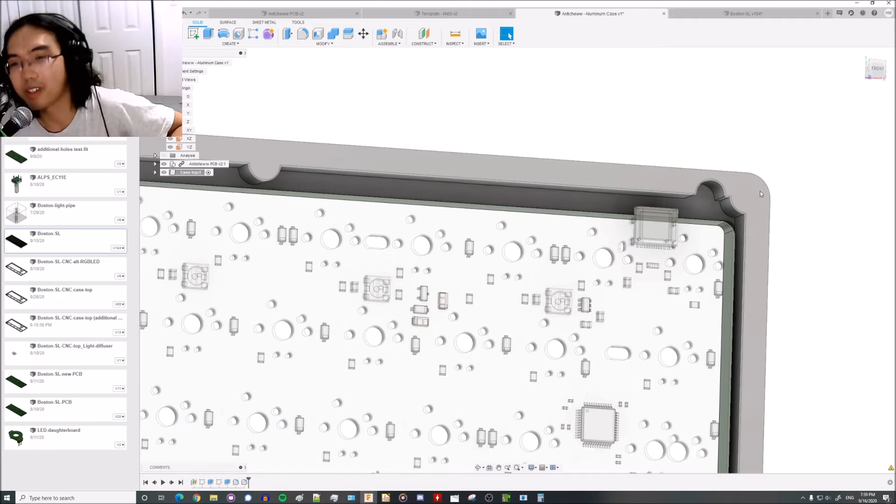So we're gonna get back to this. We need to fillet these sharp corners because these aren't machinable. I'm gonna see if I can do a 3mm fillet on these so that they can use a 6mm end mill to machine these. Okay, that worked.

It just looks a little funny, but that's fine. So let's use 3mm on all of these sharp internal corners. This one, all these corners. I think there's like a rules fillet feature now where you can automatically have fillets form if certain conditions are met, but I haven't really looked into that. So I'm just doing all these fillets manually.

I think that's all of them, or all the internal ones. Cool. And then these, you don't really have to touch these external ones for machinability, but these sharp corners hurt a lot if your palm lands on them or something. So we're gonna fillet them just so people don't bleed when they assemble this case.

So these, you can pretty much choose any fillet size as long as it's not 0. Even like a 0.5 millimeter fillet makes corners a lot less sharp and a lot less prone to drawing blood. Let's see, I'll probably do like a millimeter fillet on these. Here and here. I think that's all of them. Let's just do a millimeter. Oh, that looks pretty good.

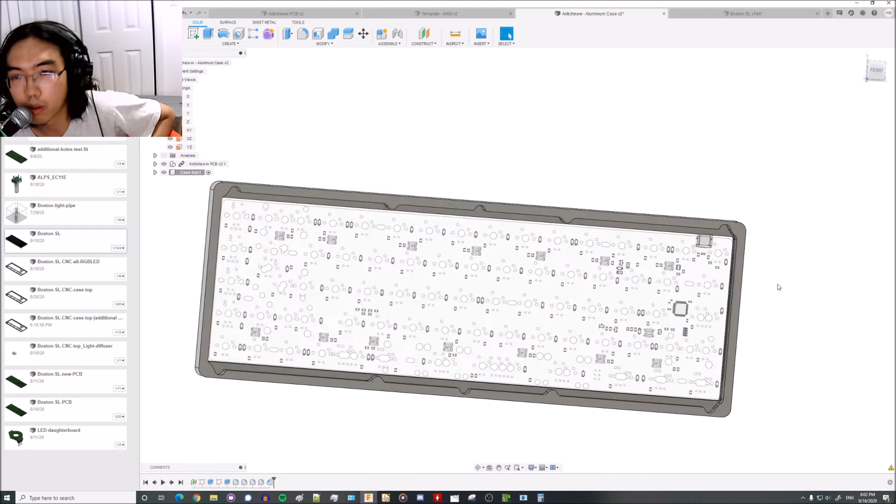We still had to add a bunch of holes for the case and the plate. But do we want to do that now? Yeah, let's do that now. Okay, so let's add a bunch of holes. So we're gonna add the tap holes for the plate, and then we also need to add tap holes to attach to the bottom case. So we use hole tool. Actually, let's hide the PCB for now.

Okay, so we're gonna use the hole tool to make these tapped holes, but whoops, I just pressed Windows key by accident. Okay, so let's start with hole tool. So the hole tool wants a sketch as the input, so we're gonna make a sketch first. And then we need the centers of all these circular features.

Though you can just cheat and just press P and project all these, and then every time it grabs a circular feature, it'll also grab the center point of it. So grab these, and then I also need the ones for the top. So I'm gonna press P for project, select this face, and grab all these edges. So now I have all these centers.

Cool, and then next we're going to use hole tool. So we want a tapped hole, a simple hole but tapped. Excuse me, sorry about that. Okay, from sketch, so let's choose all these center points. Okay, so this is the hole dimensions.

Foggy says, let them bleed, that makes them know keeb is serious stuff, you need sacrifice, sweat, and blood for it. Maybe on the designer end, I don't believe in end users having to bleed. I'm pretty sure I've drawn blood designing or making prototypes, just from like, I think there was a corner on the plate that was kind of sharp. But yeah, I would like to minimize physical injury when assembling keyboards.

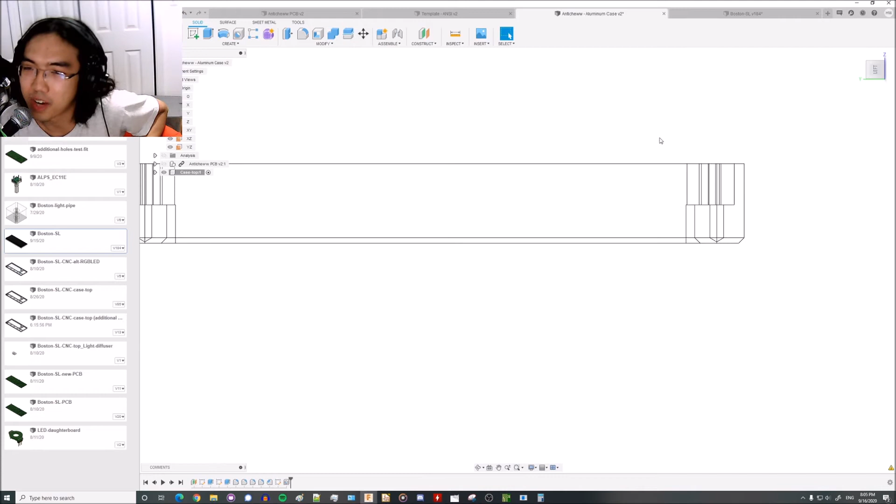Foggy says, I have another hobby called balisong, butterfly knife. I don't know what that is, and bleeding got glorified. Huh, I don't know what that is, but interesting. You can kind of see it's with knives maybe. Yeah, bleeding can be seen as some kind of ritual passage or something.

So this is the bottom of the hole. This is kind of close, so we're gonna make this hole less deep. Let's see how much room do I have. Oops.

I get why people have winkeyless keyboards now, because when you're not looking at your keyboard, it's really easy to hit... when you're going for control, it's really easy to hit the Windows key.

0.24, yeah that's a little low. Let's make the hole 0.5 millimeter shallower. Feature, let's make it 5. Oh sorry, we're gonna make it 5.5. Okay, so yeah, it looks pretty good. So 5.5, so that means a thread.

So that's for the hole, but the threads can't. So when you make a tapped hole, usually you use a tool called a tap, which I don't have in front of me, but it looks like a screw, but it has a bunch of cutting features on it, and you run it down this hole. So when you make a threaded hole, the threads can't actually reach all the way to the bottom, because of the limitations on how tapping is done. Usually you can get 2 threads. The threads can go as deep as like 2 threads above the bottom of the hole.

So for M3 by 0.5, the threads are 0.5 millimeter apart. So 2 threads is 1 millimeter. So the deepest the threads can go is 1 millimeter from the bottom of this hole. So that's going to be 5.5 minus 1, so there's going to be 4.5 millimeters of thread. That's pretty good, you usually want at least 1 thread of engagement. And then you just want to make sure it's also deep enough for whatever screw size you want to use.

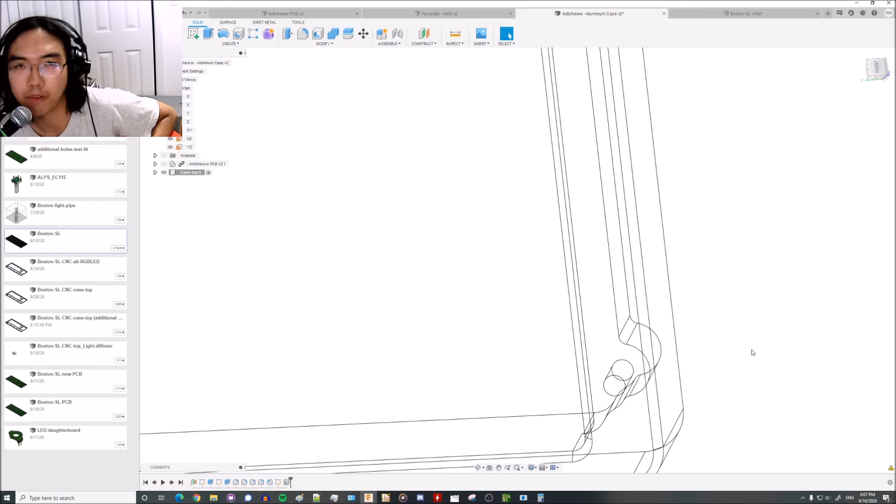So I have 4.5 millimeters of thread, and there's going to be 1.5 millimeters of plate. So I can use a 6 millimeter screw to attach the plate to this hole. And then usually screws come a hair too short, so a 6 millimeter screw is going to be like 5.8 or 5.5. So I can probably safely use a 6 millimeter screw to attach the plate.

So that's that hole. And then we just need the holes for attaching the top of the case to the bottom. So we're going to do the same thing as we did: we're going to make a sketch, project this entire face to grab the centers of these, and now we have these center points. Let's make some holes.

I can probably just keep these. Actually, I can make these deeper because I have a lot more room to play with. So let's select all these center points.

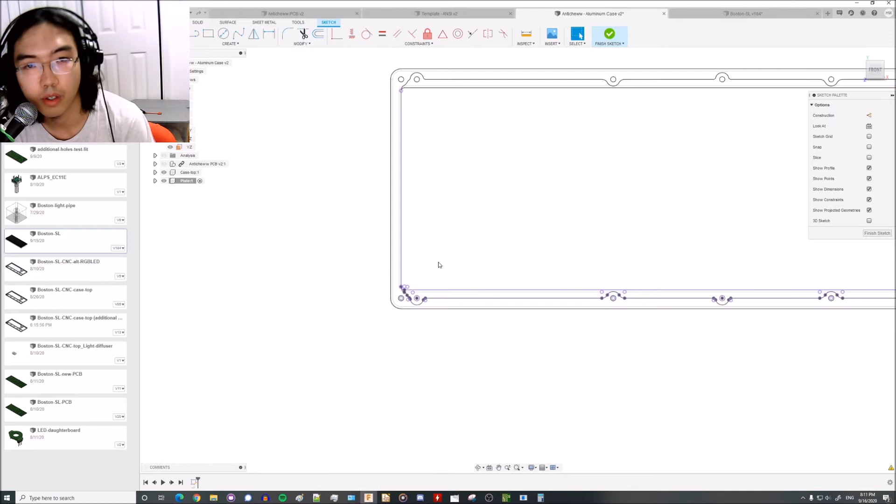Okay, so we're just gonna project the outline we want, but I'm gonna do this whole thing. And then we want this, and we want this line. So I'm gonna go back to shaded with visible edges.

Didn't grab. Okay, so I need to grab this entire outline. Oh fuck it, we'll just grab this face. Okay, that didn't work. I'm gonna manually select all these edge features. I think that should be all of it.

Okay, and then we actually don't want these ones. So this is the outline of this cavity, that's where the plate's gonna go. So, sorry, I don't want this little guy.

So we're gonna do a slight offset. You don't want to make the pocket that the plate's supposed to fit into exactly that size, because inevitably the manufacturer is going to make this case a little too small, or the plate is going to be a little too big, and it's just not going to fit. So you want a little bit of clearance so that if either of those two are a little off, it's still going to fit.

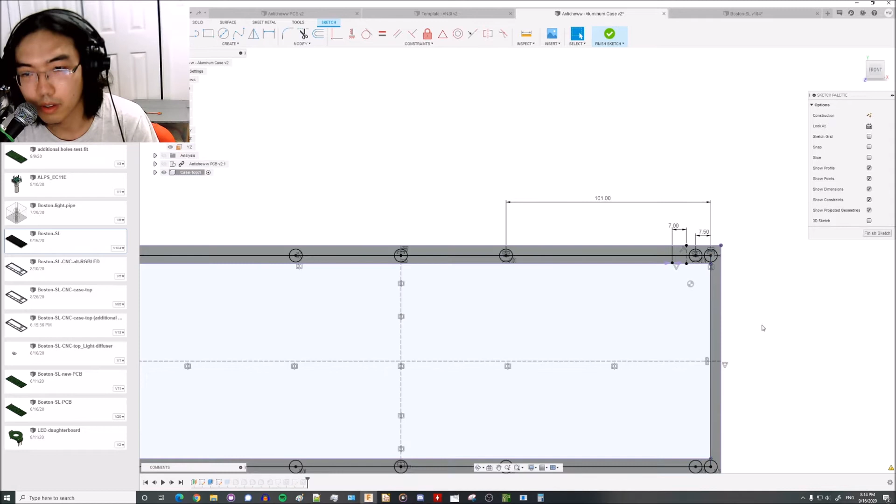In case top. So, oh it's this - wait, is this actually the... okay yeah, this is the extrude. So this line needs to - what are the relations on this line? Might be on the other one. So this line.

This is the general thing I hate about relations, it's really hard to see what relations things actually have. What the fuck? Oh okay, it's this dimension. I want to change this to 4. There we go, okay.

Okay excellent. So now there's a little - you can kind of see this wall is a little offset. I apparently broke this sketch over here. Oh, what is this sketch?

Oh, that's for the holes. Okay, so you kind of see this feature is yellow. It's kind of hard to see on the screen, but something's broken on the sketch. Don't know what it is. Actually, you know what - oh, it's on this face.

Sometimes, okay, so when I don't know what's broken, if it's a feature that's kind of towards the end and there aren't other features relying on it, I'm just gonna remake it. Oftentimes that takes less time than trying to fix it. So we're gonna redo those holes we did earlier, just so the feature tree isn't broken, because broken feature trees are bad. Do not have red or yellow features in your feature tree - it is just bad, it will cause you a lot of problems later, so do not do it. Fix it when you can.

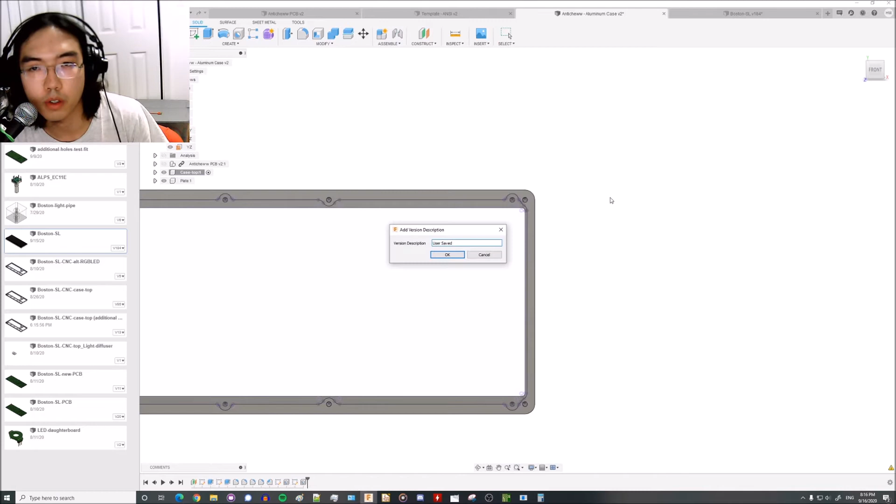Okay, cool. So those holes are gonna be remade. Okay, those holes are done. I have a slight concern. I think there's enough wall thickness between the edge of this hole and this wall. Excuse me, that's a little close.

So it's an M3, so you're gonna lose half. So it's gonna be a half a millimeter wall thickness. Should be okay just because it's a hole, it's not like a large pocket, it's just a hole. So there's only one part that's a little thin. That should be fine. Not too concerned about that. It's still not great.

But okay, well, let's get to the plate. So this is the plate.

This is gonna be the sketch that makes the plate. So I'm gonna delete this, actually, let's just do this all over again. All right, we're just gonna project this face. Okay, that got us everything we want.

And then we're gonna do an offset off this kind of outline here. So, just curious who's still watching the stream. Okay, 4 viewers. So let's use the offset tool.

I usually do like a half a millimeter off the edge. That's probably a bit much, but in a lot of cases, more clearance doesn't hurt. This is one of them. A lot of clearances, more clearance does hurt, but this is not one of them. So let's do half a millimeter off the edge.

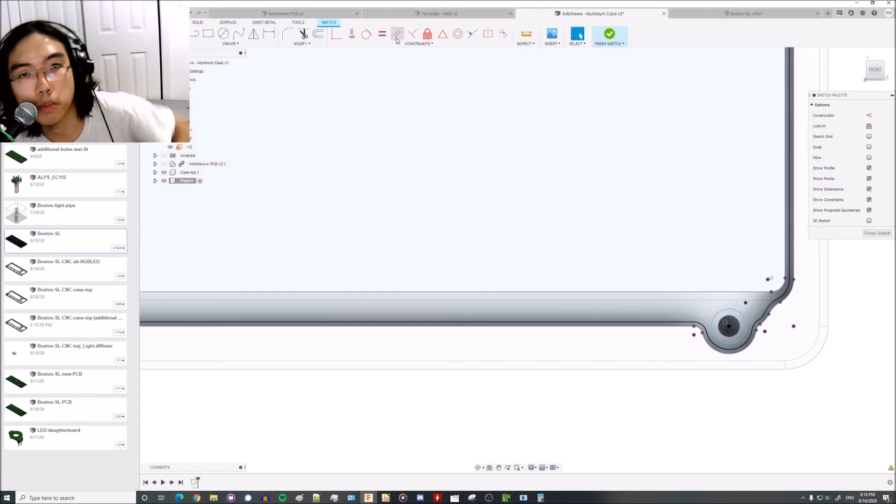So we're gonna make a bunch more of these holes. 3, 4 - it's a little big. 5, and last one. And then we're gonna spam the equal constraint a bunch of times. So this hole is gonna be the same size as this hole, which is gonna be the same size as this hole, same size as this hole, same size as this hole. Okay, that's all the holes.

Okay, and then we're gonna make the plate. So we're gonna do an extrude off the sketch, select all the correct features. Cool.

So plates are usually 1.5 millimeters thick, unless you're trying to do like a really thick plate, but 1.5 is the usual. Then your switches clip in really nicely. So we're gonna do 1.5. So this is gonna be a plate, and then we need to make all the cutouts for the switches.

So, earlier on the stream, when there was, I think, just one person watching, I used Swill's plate generator and keyboard layout editor to make a - where did I put it? Antichew case plate files. Okay, so I made this template using keyboard layout editor and Swill's plate generator.

Looks pretty good. I'm gonna have to add a bunch more cutouts so Antichew supports a lot of bottom row layout options. This one is only, I think, the default 6.25U spacebar and 1.25U mods, but I'm gonna add more cutouts for all the other options that Antichew supports in a bit.

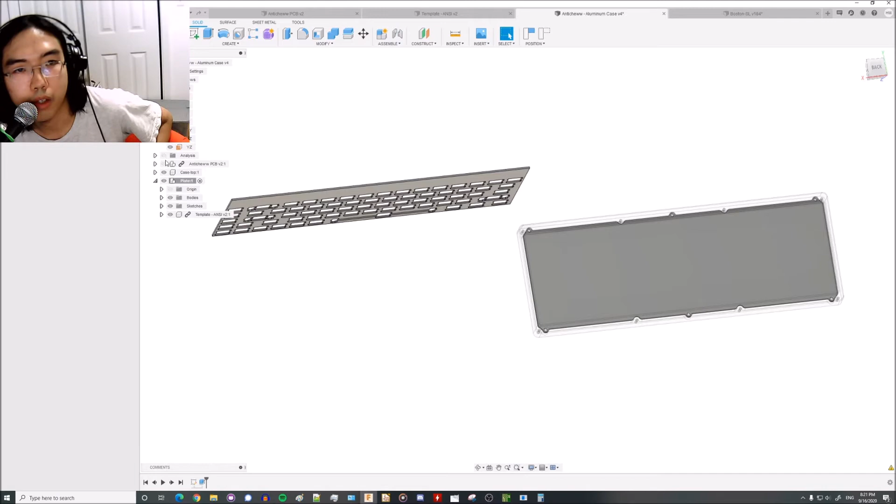What I personally like to do is to make a cutout in this plate right where the escape key is. So we're gonna let's make the PCB visible again. So here's the PCB, so we're gonna edit this plate. So let's put a cutout right above the escape key. That's just gonna be like a centering - a homing point, so I can correctly mate this template to this plate blank.

So let's make a cutout above the escape key, capture position. So let's project this hole, and then - so the usual cherry switch cutout is 14 by 14 millimeters, so we'll just make a cutout of that size.

Cool. Probably want to not make this relate to this feature on the PCB, so when the PCB gets updated, this isn't gonna break. But we'll just do this for now.

Okay, so this, now we're gonna extrude this. Do through all. Cool, that should be positioned right above the escape key. Yep, that looks right. Okay, so we're gonna use that, and then.

So we're gonna do a joint between this template and this plate. So, okay, so I'm gonna do middle of this line to middle of this line. I think I flipped this 180.

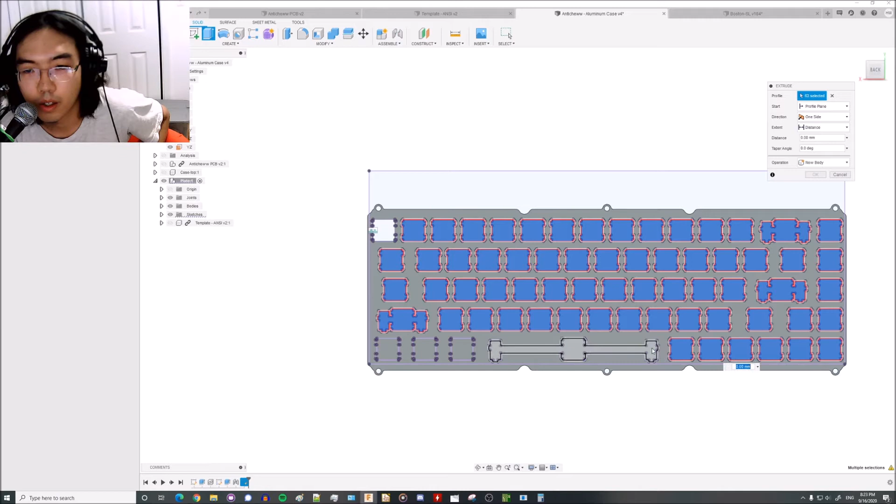And cut all the way through. This is where Fusion starts to slow down because there's just a lot of sketch entities in this.

Okay, cool, that's a plate. I guess I should probably add the bottom row feature, the other bottom row layouts right now. So let's go back to keyboard layout editor.

Okay, sorry, that's for Boston. That's okay. Let's pull up Gondo's documentation.

So we have all these layouts. We could try to support all of them, but that's gonna actually, yeah, we actually probably could support all of these. It's gonna Swiss cheese up the bottom row a lot, but that's probably doable.

But I also want to add ISO enter support, split backspace, ISO shift. I don't know who actually wants to use like a 2.75U right shift on a 65%. That kind of defeats the point of a 65%, but we'll think about that one.

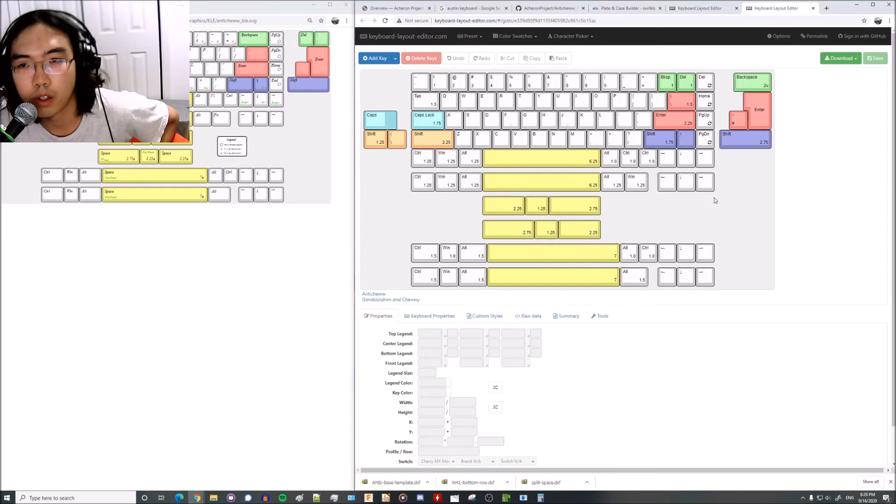So we're not going to support the blocker ones because I really don't want to add a blocker. So we're going to split, so this is the default, and then this is Tsangan.

So what I'm going to do is, so I'm going to keep I guess the tilde key, but I call it escape. I'm going to keep that one and then delete the other ones that aren't changing. Let's move ISO into position.

I don't really want to support 2.75 right shift, because that's also going to kind of Swiss cheese up the plate there, but yeah, let's not. Unless anyone has strong opinions about 2.75U right shifts, I'm not going to support that.

Let's move step caps lock and ISO shift into place. Delete the bottom row.

We're going to delete all the other keys that aren't changing between different options. So I'm going to delete all the alphas except for the tilde key, which I'm going to use to reference.

Let's do Tsangan first. This is split, so this is step caps lock, ISO shift, ISO enter, and split backspace. Then Tsangan, and let's delete these arrow keys, and delete these for now. We're gonna go back to split space. So this is the alts for all these options.

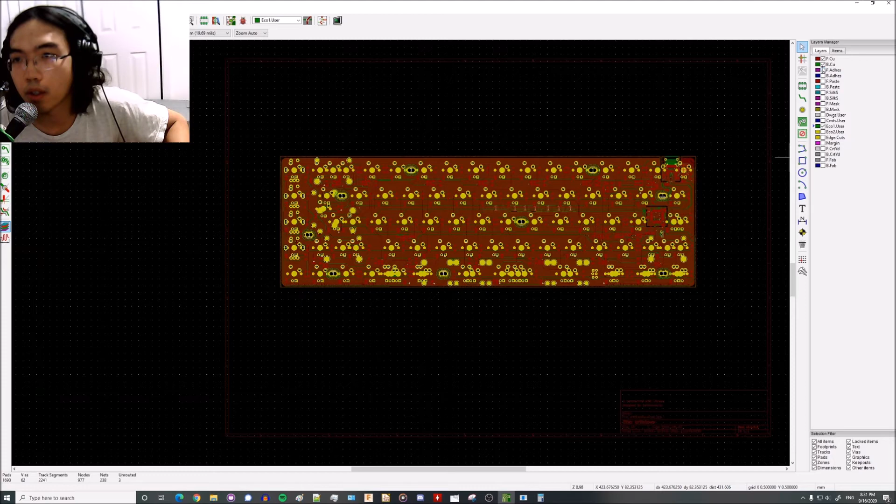Eco2, let's hide all the other ones. What does that look like? I'm not seeing it. Oh sorry, that's Eco1, this is Eco2. Still not seeing it, edge cuts. I have both Eco1 and 2. Wait, is this Anticheww? Not seeing it, try both. Yeah, this is both, edge cuts. It's not sure, is it items? Hidden text? No. It's not on the layers. I'm not seeing it, is it on DWG? User comments, margin, fab layers. Oh yeah, I'm not seeing it, unfortunately.

It might also just be my version, Acheron library or something. I think I'm on like a pretty old commit. Gondo says hold, okay, let me update the library. We're gonna update the Acheron library then. Let's wait for Gondo's commit.

Acheron library, I'm gonna delete these changes. Actually, this might be referencing... I think, okay, Gondo says give me 5. I think Anticheww might have its own copy of the library. Where is it? Where's my GitHub? KiCad files, yeah, there's an entire Acheron library folder on the Anticheww GitHub. So I'm not sure what's going on there. Actually, while that goes on, I might just proceed with the KLE method for now.

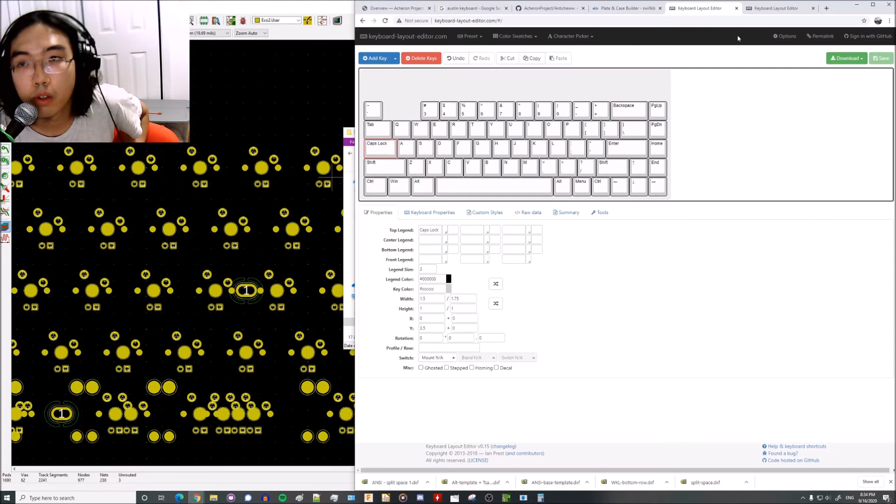Let's dump this raw data in swillkb. Then split space 1. And then let's do the other one. Raw data, put this in the swillkb plate generator, draw my CAD.

Yeah, so this is how I make plates, but the way Gondo suggested, using KiCad and the Eco2 layer, that's probably faster, because you can probably do all your alternate layouts at once instead of having to go in each time for every alternate layout. But yeah, let's make some templates for these plates.

Create sketch. I'm gonna insert those DXFs that we just made with the plate generator. So we have Tsangan. That looks right. Let's fix this entire thing. And then let's do an extrude.

Shoot, okay, that's on a newer nightly. I'm on mid-August because I have a weird issue. This was done on the September 9th nightly, so we're both on nightly versions of KiCad. I'm on early August. I've tried the newer nightlies, but they don't play well with my files - it's missing all the footprints and pads when I open it. I searched the KiCad forums and couldn't find an answer, so I went back to the early August nightly. I can't open this right now without installing a newer version, which I don't want to do. So sorry, we're not gonna do that.

You have to fetch? No, what are you referencing? You have to set them to be seen. Okay yeah, I just haven't looked hard enough for that setting. Come on, update to the nightly, I'll help you. Okay fine, we'll update. I was working on this Boston PCB yesterday, adding a bunch of features, and I didn't want to use a newer nightly because it still has a bunch of bugs. Oh shit - okay, I'll deal with that later. I tried the newer nightlies and couldn't figure out how to open the pads.

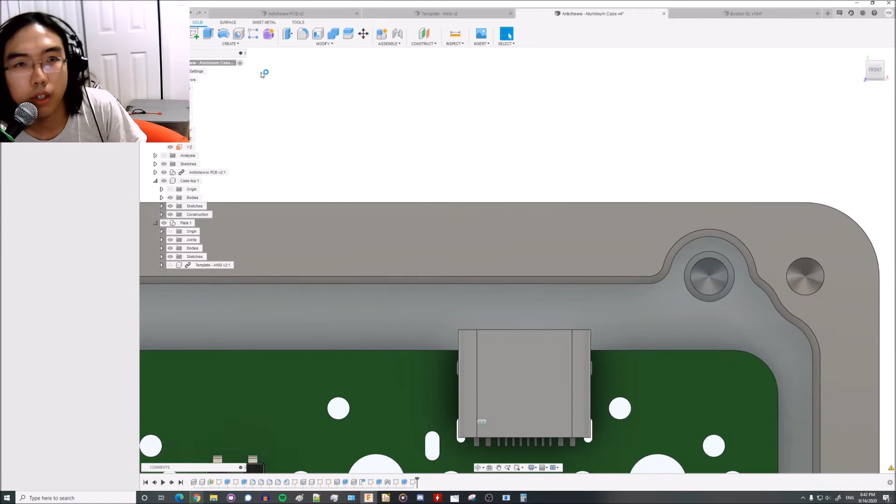So how do I want to do this? Let's do an extrude here, let's make a sketch here. Then let's do - I'm on the wrong one, actually selected the top level assembly instead of the top case. So top case is here. Let's do a sketch here. So this is the aluminum version, I'm gonna do a 3D printed one also. That's probably gonna be in a different stream because this is taking some time.

So we're gonna make the cutout for this USB port right now. We just have to choose some dimensions. It's gonna be probably 7 millimeters from the center. Let's make a center line off the center of the USB port, and let's make this 14 millimeters wide.

Let's center that using the symmetry tool. Then, how much of a gap do we want here? Let's do like 0.5 millimeter.

I'm trying to not reference the PCB because the PCB step file is going to change in the near future, so I'm going to have these reference other things. Let's do the edge of the case here.

This will over constrain the sketch. Okay, just call that 8.1. And I want to delete this relation to the USB port. So we'll just make the center line off the side of the case.

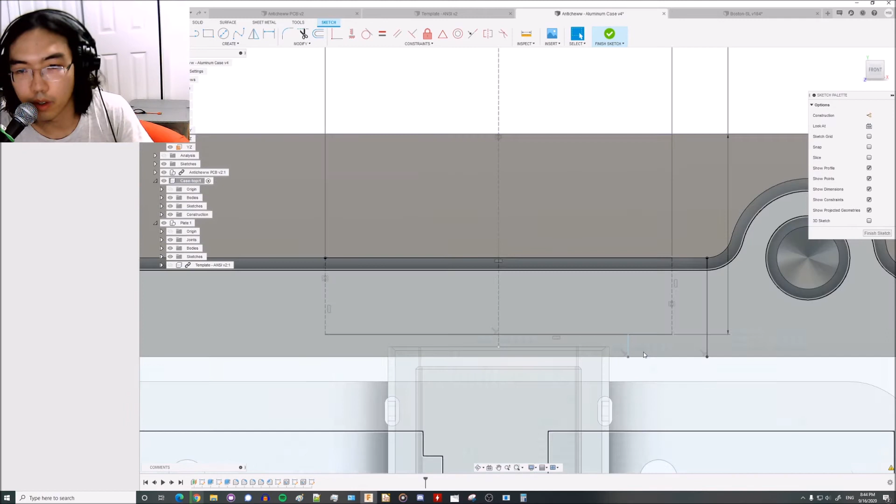Let's do 0.5 millimeter off the side of the USB port. I tend to go to like 0.5 millimeter as my go-to clearance dimension. It's a little much in a lot of cases, depends on the machining process and how confident you are that things will fit. 0.5 millimeters is pretty loose. You can usually go down to like 0.2 or 0.3 if you're good. I'm just gonna do this with a lot of clearance though, so it has a bit of wiggle room.

Foggy says do 14 by 8. Yeah, that's a plan. I'm just extruding the walls off the side of the cutout. Actually, these shouldn't be construction lines. Okay, and then let's mirror that.

So we have this for the cutout. Let's extrude some stuff to make the USB cutout. Let's hide the PCB. Dang it, okay, let's hide the plate also.

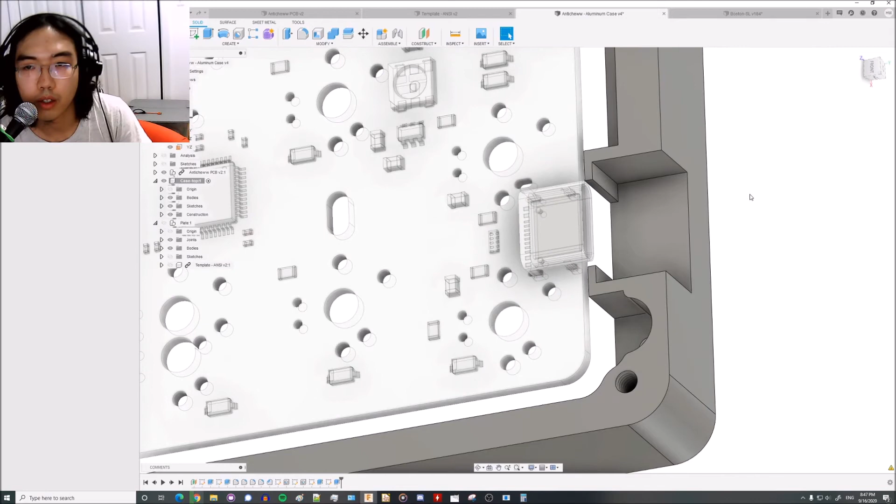I normally don't do this, but because this extrude cut only covers this part of the rectangle, I'm not going to undo that. I'm just going to do another extrude to move that face back up. Normally I don't advocate doing multiple extrudes, but here it's actually just easier.

So 14 by 8. So where's the center of the USB port? There's not an easy way to grab that dimension. Okay, well, let's extrude this back up.

Oh, actually, fuck. Okay, what you want to do is actually, so you have the extrude that goes up to the port, and then you have the extrude, which should be a lot lower, that goes up a bit lower than that, so that there's room for the edge of the USB cable.

So what we're gonna do is make a new sketch, make it a rectangle, here to here. Let's just do 0.5 millimeter off the edge of the USB port. So how much distance is that? So that's 6.6 minus half, so 6.1.

Okay, this is gonna be a pretty thin wall. 0.9, yeah, that's really thin. Actually, I can make it a little thicker on this side, so I'm gonna do that in a little bit. And this can go up a lot. So 14 by 8.

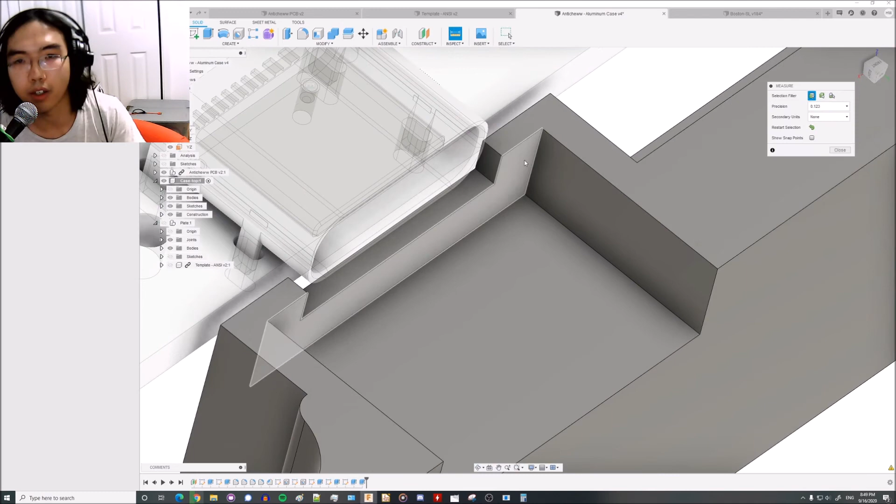Well, we're going to add some fillets here so that this is actually machinable. Okay, that's... so 3mm fillet is a bit large. Let's see what I can do here.

How large of a fillet do I want? So the CNC machine is gonna have a 1.6 loaded for this operation, but that's on a separate operation than what's gonna be used for the bottom side of the case. I really want to make this fillet 3, but I don't think we have room for that. Could dog bone this. What we should do is this first extrude needs to be bigger, so trying to get some more room so I can use some larger radii so the machinist doesn't have to use like a 1mm end mill. So let's make this bigger.

So I'm going to move this line over a bit. Or cut from the side, not much you can do for this tight. Yeah, I just want to avoid adding the setup to cut from the side. Like, yeah, you can have the end mill come in from this way, but a lot of machinists will hate you because this is a very non-rigid way to set up. I guess you could do that before you cut the rest of the case, but I'm gonna try to avoid adding a setup, so I'm gonna try to do it from the bottom.

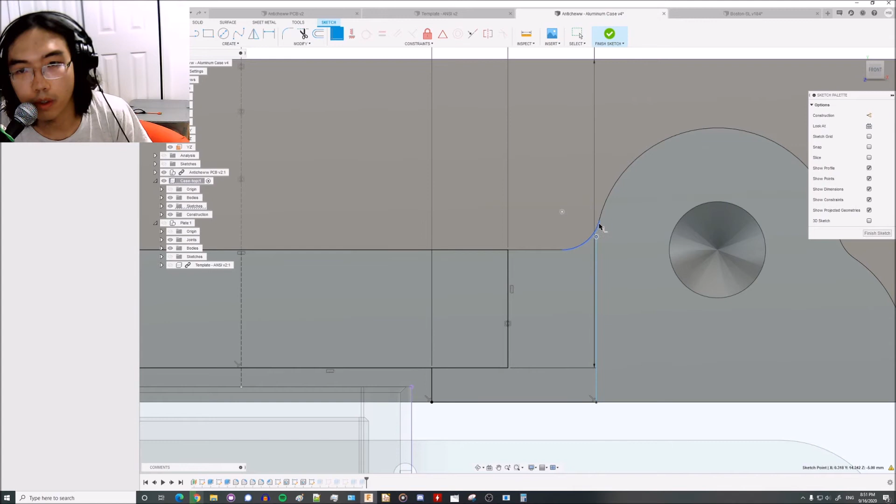So I'm gonna move this over. This has a coincident here, and that lets me move it over. So let's make this wider. Let's go to the start of this. Let's do right here. Let's do coincident to this point right here where this circle starts. Oh, actually, that actually fucks up this circle, so we're gonna do a little bit less.

Let's do like, okay, actually cut that first, then from the flat side. Yeah, that's an option. I just want to avoid that setup because this USB port is also kind of right in the middle, right in this edge. So this is kind of ideal already from just being able to do that cutout from the top and bottom, or just from the bottom. So I got a full slab of aluminum to hold in the vise. Yeah, it will be more rigid if you hold it that way. It's still an additional setup. If I can avoid it, I'm gonna avoid it.

Okay, so this is the 6mm end mill. So let's do it right just past that. Maybe like here. Actually, we'll just do it right at the edge. Okay, I'm gonna do a tangent here. Tangent to, oh sorry, that's perpendicular. Tangent from this circle to this one.

How's the KiCad download going? It's about halfway there.

Okay, so how's that not fully constrained? Oh, okay, that's why. Need to make the circle equal to the circle. Cool, so now there's more wall there. Then we can make this cutout actually wider, and then that gets us room to make this fillet a bit bigger.

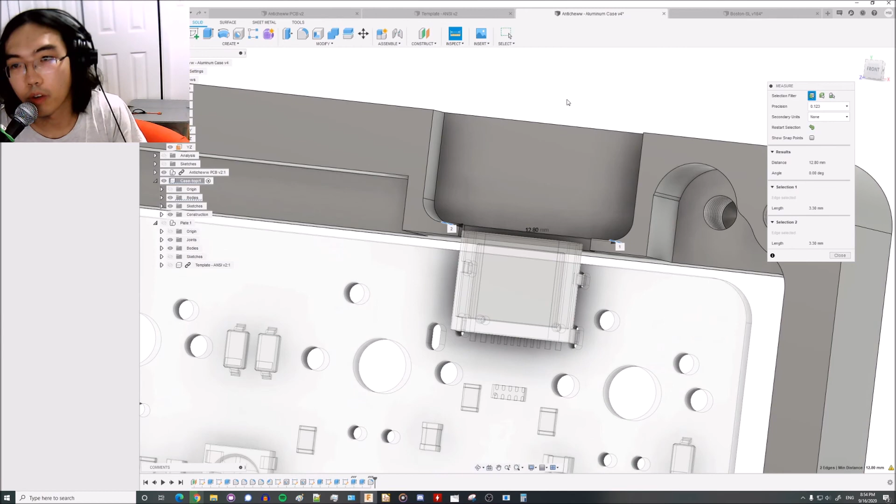Okay, so let's see how large of a fillet we can do here. It might just be a 1.6. Then how much room does that leave for the cable? 12.8, that's kind of pushing it. You have a little room before the cable. Actually, this might work. Let's go measure a USB cable.

Where's my nearest USB-C cable? The one on my keyboard. Okay, let's see. This cable is 12.1 wide by 6.46 tall. Okay, it's a pretty small cable.

The question is, how much does the edge stick out from? Okay, so here's my prototype, Boston, one of three. So how much does the edge of the cable, like this molded plastic part of the cable, start relative to the end of the female USB-C port? It's probably about 1 millimeter.

Okay, so I actually might have the room to do this. Yeah, let's just do some test sketches here, just to see if the port fits. So we have our USB-C cable end. Make this about 1 millimeter off. Is the cable gonna hit the sides? Let's find out.

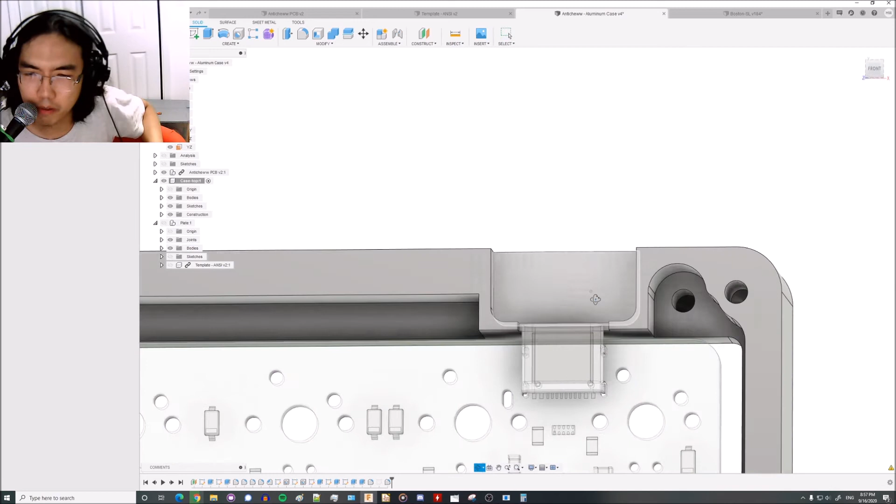So sorry, so Foggy, you're saying there's 1.5 millimeters from the USB-C female port to the plastic cable housing, and 1 more millimeter more where it will connect but not fully click. Okay, so I think that means I have 1.5 millimeters, but I did this with an assumption of 1, and it looks like it'll fit. So yeah, let's just go with that.

Let's add a fillet here. Let's add a 3 millimeter fillet here, and then let's fillet these sharp corners. Let's do 1. Aesthetically, it's not ideal to fillet these, but I'm probably going to.

Do I want to fillet this corner? It's gonna look worse, but it's gonna prevent cuts and blood. So let's just add a chamfer here instead. We'll just call that done. Let me adjust this camera a little bit.

Okay, cool. So what are we here? Okay, are we done with the top? I think we are. So AIO3 says 1 to 1.8, where 1.8 will be barely touching, not fully clicked into place. Okay, well I used 1, so it should be fine. But yeah, thanks for that, Foggy.

Let's see where we're at. Okay, so let's add a fillet here, so that this sharp corner kind of matches more with the edge of the USB port. What's this radius? 1.2. Okay, let's just do a 1 millimeter fillet.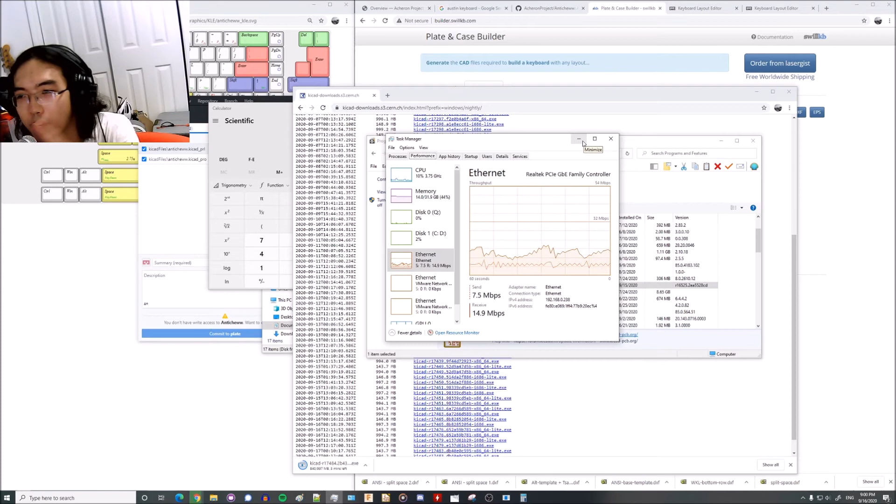Your internet speeds suck. Yeah, I don't know. So I have 100, in theory I have 100 megs down, and I'm only getting like 13 megs. It might be their server, it might not be my fault. As far as I know, the server might be in... I think the server is in France, and that might be part of the reason. The server the Windows nightlies are hosted on is far away.

Anyway, so what was it doing? Yeah, I was gonna uninstall the current version of KiCad. Control panel, uninstall. It's still running, I thought I closed everything. What do I have?

Oh, I think sometimes Pcbnew doesn't close properly. So let's go to Task Manager. It's alphabetical. Okay, it is 2 Pcbnew instances that I have no idea where that's from. Also, out of 3 mirror KiCad, there's only 1 fast.

That's good to know. I don't know if they have the nightlies on all the mirrors though. So okay, I think I uninstalled every KiCad instance. So let's uninstall KiCad.

Yes, I want to remove everything. So while that goes on, the download's still happening.

Okay, back to the case. It's gonna fill out these 2 corners. Let's just do. So this is gonna be done with a ball-nose mill most likely, because of how it's held. So this is kind of like looking down from the CNC, and if you want to make a fillet on this axis, it's probably done with a ball-nose mill, or you just run like a square end mill back and forth a lot of times. But ideally, it's done with a ball-nose mill.

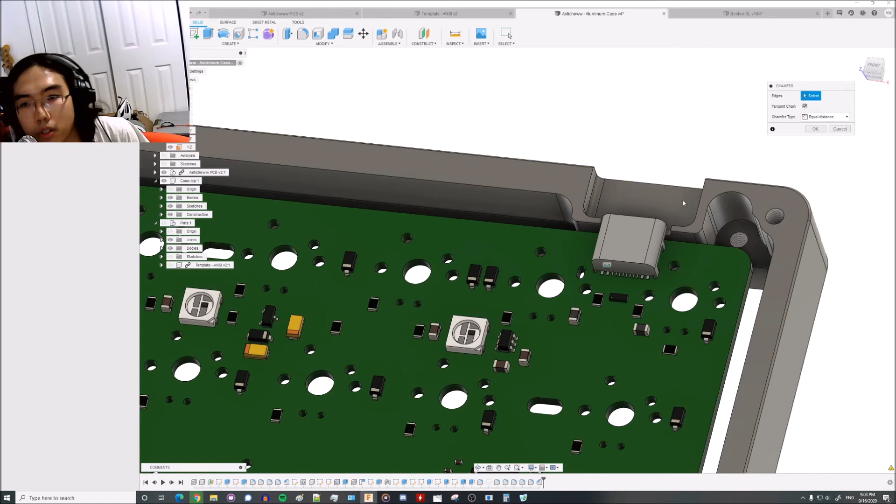And then could do a chamfer on the inside too. We want to, yeah, why not? We already have a chamfer tool loaded on the CNC, so let's do 0.3. And then, looks pretty good to me.

Cool, let's start the middle case then. KiCad is still 30 seconds left. Okay, well that's enough time to start the bottom case. So the bottom, how do I want to do the bottom?

So we need to give enough clearance for this PCB. That'll kind of determine the thickness, and then we probably want to do some bump-ons also.

All right, well let's start with the bottom. So how do I want to start with the bottom? We're going to make a new component. Sorry, not new drawing, new component. I'm going to call it, this actually might be a middle because of how I want to do this case.

So actually, let's name it the middle. Actually, let's call it the bottom. We'll call the weight something else. So we standard internal from bodies. Okay, right parent. Okay, so let's start making the bottom.

Oh, that chamfer actually is annoying because here. Okay, we're gonna add that chamfer later because that makes making the bottom harder right now. So we're gonna go back to the top and delete these chamfers. We'll add them back later when it's easier to do so. But right now, those chamfers make it harder to start making the bottom.

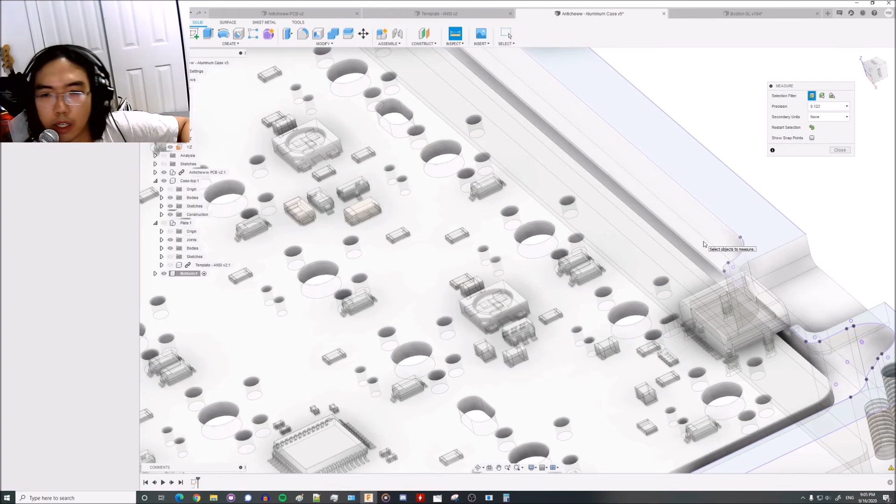So there are these RGB LEDs, but I'm just gonna make an aluminum case, so they're not really gonna be visible. But we probably want to clear this by, let's do 4.5 millimeters off the bottom. So the minimum clearance you really want is like 3. That's if you have like a really rigid plate. So the pins from the switches will generally stick out about 2.5, and then all the screw heads that hold

the stabilizers in stick out by about 2 millimeters off the top of the PCB. And then you want it a little bit just to account for board flex. So let's do, so yeah, like 3.5 or 3 is about the minimum safe one, but let's do 4 if people want to use like a flexi plate.

So let's extrude. So how much do I have right now? Right now I have 0.9. So 4. Okay, I shouldn't be doing arithmetic this simple on a calculator, but whatever. We have technology. So this is 3.6. Yep, I can still do arithmetic. So I'm going to extrude, new case, 3.6 millimeters.

And let's check that that gets us 4.5 from the bottom of the case, or the bottom of the PCB. Yep, that does. And then I'm just going to double check a couple things, that the distance from the plate is also correct. So from top of the plate to top of the PCB should be 5 millimeters. Yep, that's correct. And then, cool.

Okay, so back to, I think KiCad should have downloaded now. So let's install that. Yep. Wow, setup is loading, installer's already running.

Oh, that's for the uninstall. The uninstaller is still running. Just trying to also not further dox myself, but okay, let's just run the installer again.

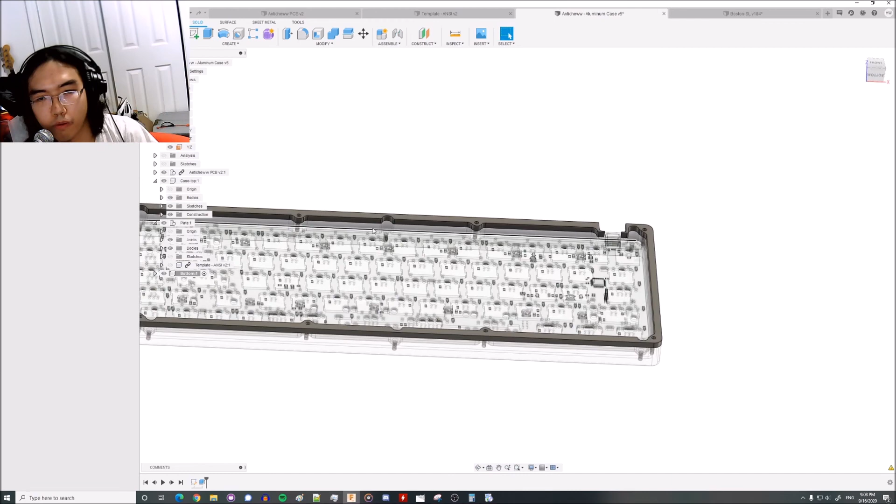Okay, so we started this part of the bottom, and then we're gonna do the actual floor of the bottom case. So let's do that. I'm gonna make another sketch and then another extrude. Project - we're just gonna sort of project this entire outline.

What else do we want? We need to fill in a bunch of gaps. Actually, the other thing - does that give the correct USB port? Okay, we'll fix that later.

Okay, so let's make the floor of the case. Extrude - I think that's everything I want. So how thick should the floor be? Let's do 2.5. That should be pretty machinable.

Okay, that's the bottom of the case. Looks fine so far. I think we had to make these holes larger because this is a tap diameter, and we had to make this the clearance diameter. So that's one thing we have to do.

We also had to fix this USB thing, so we had to do an extrude here to raise this. But yeah, that's the beginnings of the bottom.

Let's see how the KiCad install's going. Oh, that was fast, okay. Usually takes me a lot longer to install KiCad. Okay, if Gondo's still on the stream, let's fire up KiCad.

So we want the latest Anticheww. It's GitHub Anticheww.

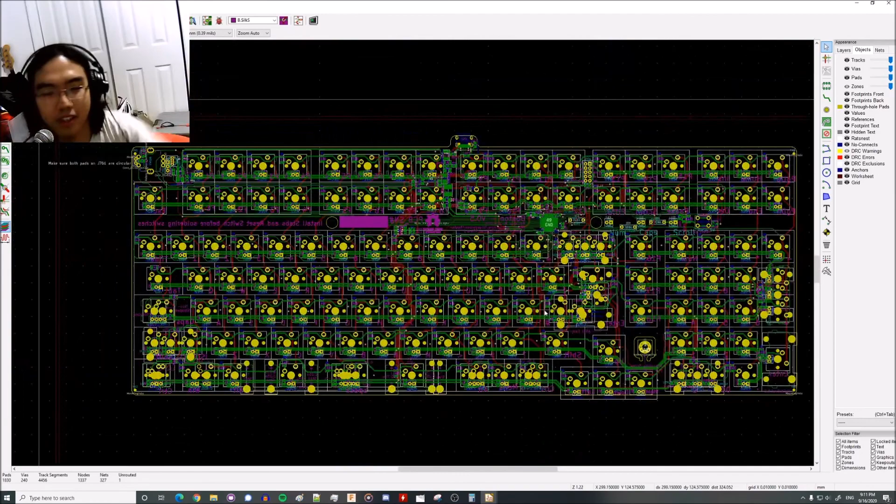Awesome, okay, so we're gonna make the plate. Let's go, so we're going to the plate. So it should be on the edge cuts layer. Let's hide everything else, except edge cuts, or edge comments, or eco, or whatever it stands for.

Okay, that looks good. How do I export this? Oh, this doesn't have the switch cutouts. That's the other thing that I was trying to do on this plate.

Well, let's make a plate this way also. We'll just make plates both ways. So it's on eco 1. Then... so I need to export the DXF out of this.

I do not remember how to do this, but I think it was plot. Oh wait, I think you change this to edge cuts and then use that to export a DXF. Okay, I want to export a... no, this is export SVG off edge cuts 1. Oh, file plot. Okay, thanks, Gondo.

Plot - I don't want a Gerber. I want a DXF off eco 1. I still probably want some on edge cuts. Not eco 1. Okay, awesome. Yeah, thanks, Gondo.

So yeah, let's start this output directory. Let's throw it into the Anticheww case. Select folder, yes, plot, checking zone. Okay, shouldn't need to do that. Cool, okay, so DXFs were made.

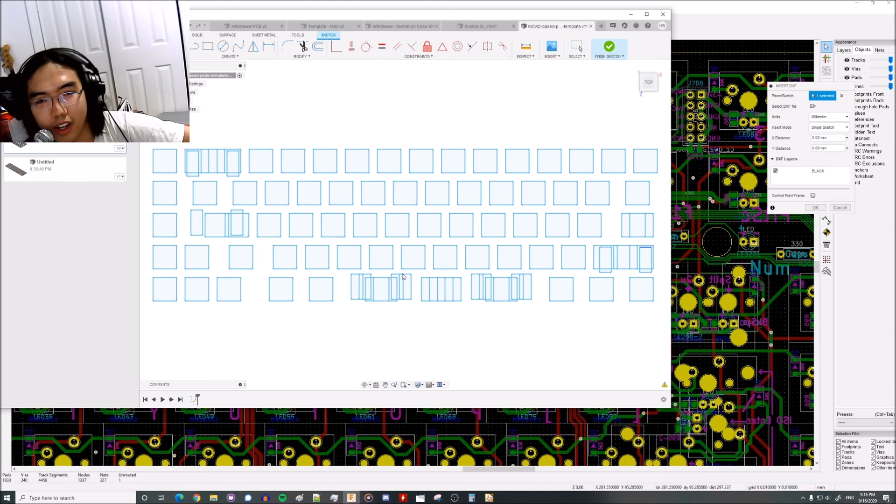Okay, so we have a lot of nested features here, but this is a pretty complete plate. It just doesn't have the cutouts for removing the switch top, but yeah, we can use this. So I'll make a plate both based off this one, and this one's actually kind of better for FR4. You kind of don't want the cutouts, but we're probably gonna do a metal plate.

I was planning to do a metal plate, and then well, this is so frozen, freezing again, but I'll make a plate both ways just to show people how to do it both ways, and also because the KLE method gets the cutouts for the switch top removal.

Yeah, while it freezes, I'm gonna take a look at Boston real quick. There's a warning. Oh, there is an unconnected item. What? Okay, there's a 3v3 here. Actually, this might be - there's some weird KiCad bugs with like duplicate UUIDs. So I think there's a repair board tool. Tools, repair board. Okay, but yeah, there's an unconnected item.

This is concerning because there might be other deleted traces that I was not aware of. This also did not show up on DRC earlier, so this is kind of concerning. What else am I missing on this? Okay, is Fusion unfrozen? No, Fusion is still frozen.

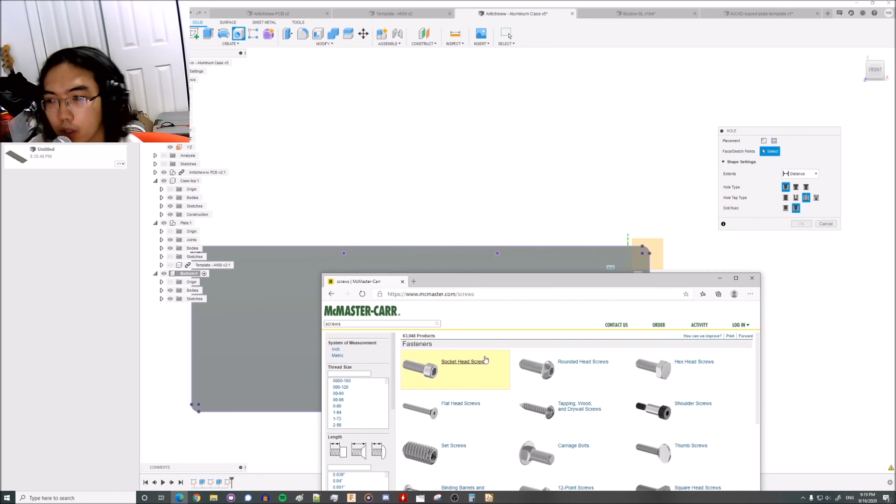Okay, let's see what screws we want to use. Let's make this bigger. Socket head cap screws, metric, M3. How much room do we have here? I'd be able to use like a regular socket head cap screw.

6.1. Yeah, let's just use a regular. I'm debating between, so there's a couple different sizes of screws. There's like a regular socket head cap screw, which is narrow with a narrower head and is taller, and then there's a different one where it has like a wider head, but it's thinner.

I usually use the second kind. The issue with the second kind is the hex. The hex is smaller, and if the hex is smaller, then it's easier to strip. Because a normal M3 socket head cap screw uses a 2.5 millimeter hex, but if you go with the wider head option that's thinner, then it usually uses a 2, which is actually noticeably easier to strip. But the wider head is nice, so

Let's use a regular one. It's easier to get, so we'll just use a plain, normal whatever DIN 912 socket head cap screw. An M3, so it's a 5.5 millimeter diameter head by 3 millimeters tall. So we're gonna use that for the counterbore dimensions.

So let's make a hole. Let's see. Okay, so actually let's hide the top case for now. So make a hole. I'm gonna make an M3 clearance. I have these memorized, but I'm just gonna do it the proper way through Fusion.

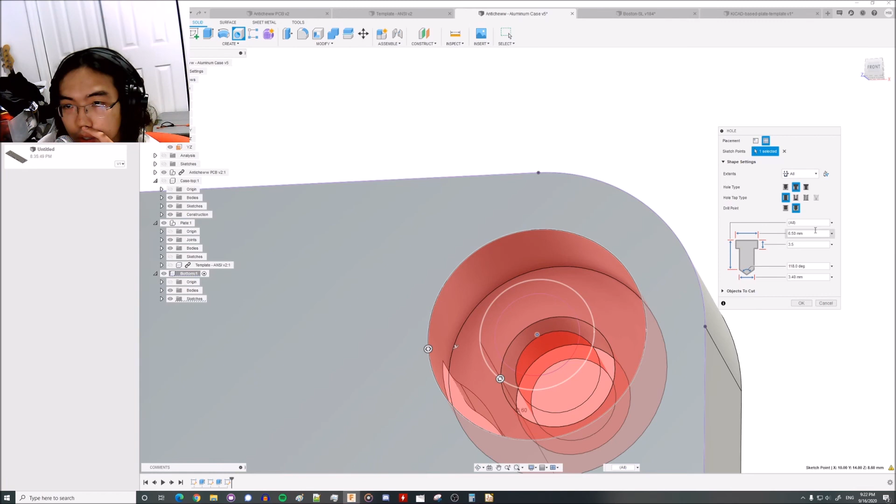Okay, so 3.4 millimeters diameter for M3 clearance. Make it 3.5 millimeters tall for the counterbore by 6.5 diameter, and then we'll do a through all for this. Okay, looks good. And we'll just make a bunch of these.

Okay, so those are counterbore holes. What else needs to get done on the bottom? Let's fix this USB port. So this needs to go up a little bit. So we need to do an extrude here.

Okay, so let's hide the - we want the USB port visible, but not the rest of the PCB. Whatever, let's hide the plate. Okay, so create sketch. Oops. Okay, so we want to raise this part. So let's make it a little bit wider so that this thin wall here isn't as tall.

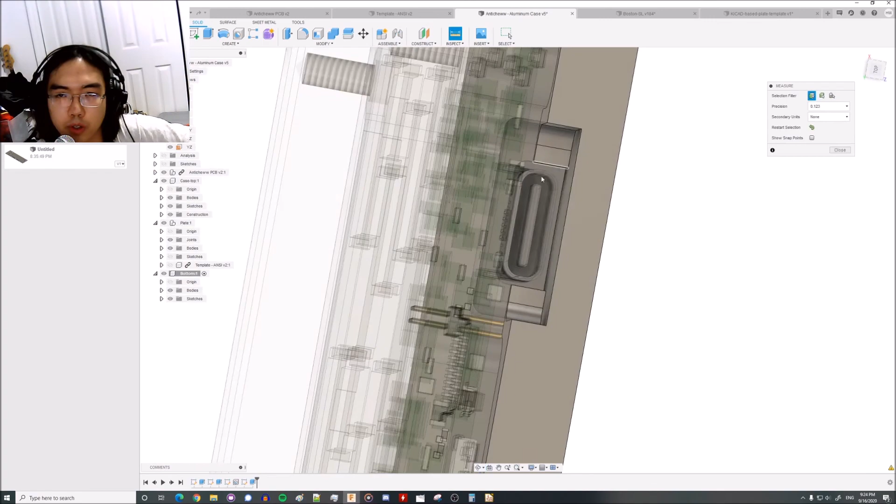Okay, we actually want to extrude this part down so that there's more clearance for the USB connector, and then we want to extrude this part up so that there isn't a huge gap between the port and the bottom. Okay, so how do I want to do that? Let's edit this earlier extrude. So just add this line here so that it's limited to the portion behind the USB port, the portion below the USB port.

So let's edit this extrude. Okay, and then this actually wants to go down. So to get the 8 millimeters of clearance that Foggy suggested, we need to extrude it down by 1.1. So negative 1.1. Okay, cool.

This looks good. Let's add the fillets. I think it was 1 millimeter on all of them. Cool, that looks good.

It does bother me a little bit that you can see the seam doesn't really line up with the middle of the USB port. That would be nice, I just don't really want to go back and change that right now. It's also not - I mean, you're not really going to see, well, you can kind of see the seam here. Whatever, we'll let it be.

Okay, the bottom is pretty close to being done. Oh, we should add the chamfers between the seams. So, okay, we're going to talk about seams real quick. So the thing with seams - right now you can kind of see this plane and this plane are flush. This plane and this plane are flush. This plane and this plane are flush.

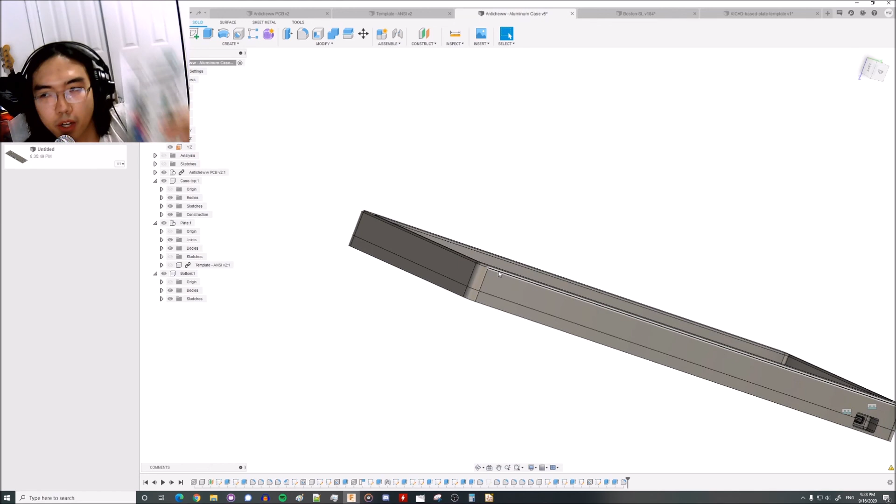So the lesson here is don't do perfectly flush seams. You want to add a feature so that the user doesn't want to take their fingernail and do this, because it's really bothersome. And if they're paying $400 for a keyboard, they're going to complain in the group buy thread that this is bad fit and finish.

So there's a couple ways. What Foggy suggests involves tightening up tolerances, and it's an option if you really want a flush seam. It will just cost you quite a bit of extra money. The other way is you can make the seam not flush, so you make this one stick out a bit more.

That's kind of what I did on the redesign of Boston. So this is the redesigned aluminum version of Boston. I added an overhang so that, because they're not aligned, any slight misalignment isn't going to be noticeable because there's already this big overhang here.

So how are we gonna deal with that on this one? What I'm probably just gonna do is add a big chamfer that goes all the way around so that, even though they're not flush, there's just gonna be this huge gap in between, so if you run your fingernail over it, it's already just gonna be like that. They're not gonna really notice any misalignment.

So let's do that. That's probably the last thing I'll do on the stream tonight.

Actually, I'm reviewing the Astro 65. Clonentropy is designing another 65%, called the Astro 65. I agreed to do some review for him tonight so he can get these cases sent out. If he's okay with doing that on the stream, I might do that on the stream. But if not, I'll probably have to cut the stream.

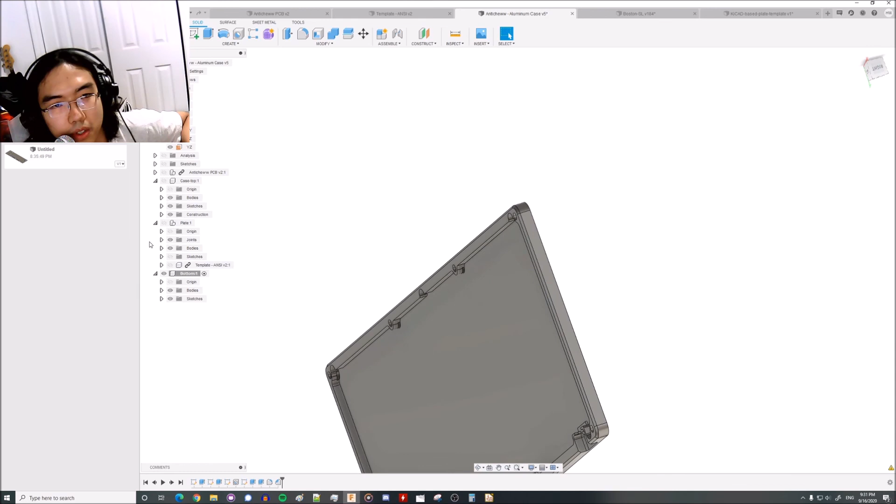You're probably right, yeah, that's kind of big. Let's see how this. I mean, it's an aesthetic choice, but maybe 0.5 would be better. Let's see what that looks like. So let's edit these chamfers to 0.5.

Yeah, I'd say that looks better. Thanks, Foggy. You could also, instead of doing a chamfer, just have a square profile and a square seam. Though dirt tends to get trapped in there, so that's not great. But let's do this for now.

It's 9:32. I'm not sure if Clonentropy is even watching the stream. Oh, we're down to 2 viewers. I don't know if I have his permission to review his case on the stream. He does say he wants it brought up at some point, but I need to do that. We'll continue on this later in the week.

So let's save this. Oh, what happened here? Oh shit, okay, that's a problem. We're gonna have to fix this later. This means I'm gonna have to switch to millimeter. Okay, I'm gonna have to fix that. And then what else? So I had to fix that.